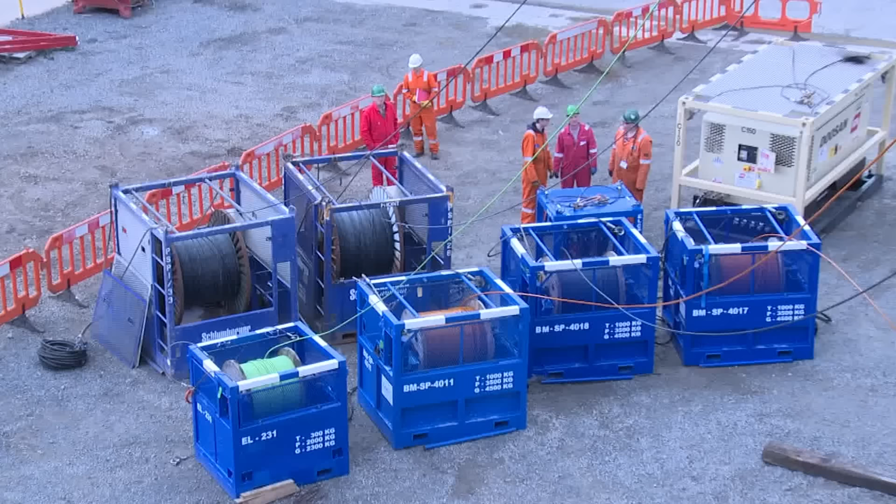It feels like an eternity ago now, but I used to work in the oil and gas industry. I was a drilling engineer. It's something I've mentioned in the past and I've been asked many times to make a video about it, but I never really wanted to. The thing is, most of what I worked on just seems really boring to me. I suppose I could talk about the Troll Alpha, or the Forties subsea pipeline, or I could make the billionth video about the Byford Dolphin incident, but I try to do topics that haven't been covered a billion times already.

6 months ago, Paul Shadison released a follow-up to the best sci-fi show I've ever seen, Solstice 5. If you haven't seen it, just pause my video right now, hit the link at the top right. Paul presents us with a dystopia, free of Earth's ethical constraints, a real-life Factorio where resource extraction must grow at any cost. The most efficient, the most destructive method of deep resource extraction presented is nuclear fracking. Something that could never happen on Earth.

Thing is, nuclear fracking isn't sci-fi. It's happened, many times. It is certainly destructive, but it may be the least efficient form of resource extraction ever attempted. It is also quite possibly the most ridiculous non-combative thing humans have ever done.

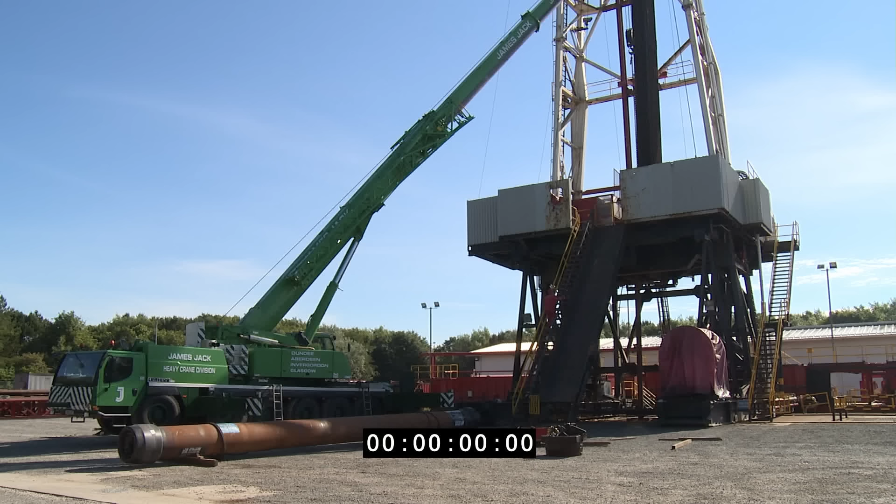Alright, before we start dropping nuclear warheads down gas wells, I need to explain how a gas well is constructed. I used to design oil wells in the North Sea. These were generally bigger and more productive than onshore wells, and they produce mainly oil. But the design is essentially the same. What I used to work on was just bigger and 100 miles offshore.

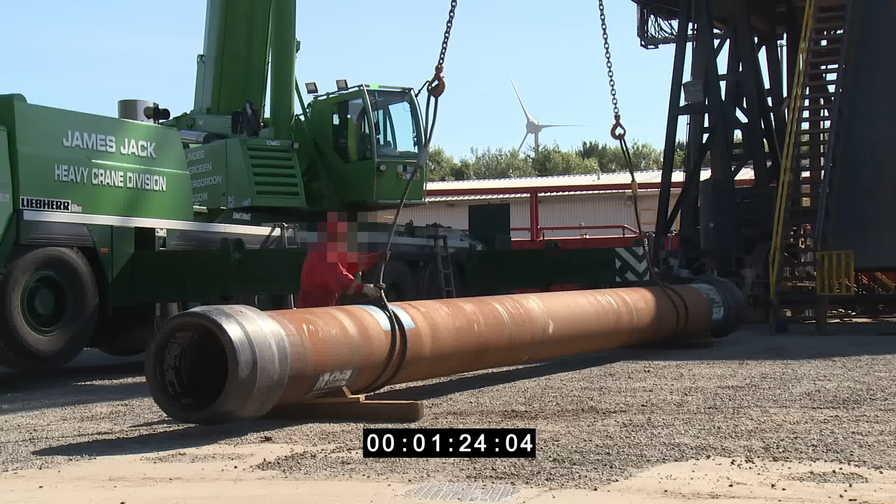I'll mainly be focusing on the drilling engineering side of things in this video, rather than the whole how-a-nuke-works side of things. That way, hopefully, that gentleman who is an actual nuclear engineer won't see this and point out every time I'm an idiot. I'll also struggle for visuals in this video, since basically everything I'm discussing happened underground. I have some public domain footage of the operations which I'll be using and annotating throughout. I'll animate what I can, and I may include some footage of offshore drilling hardware from around where I live. It's much larger than the onshore kit used in the operations discussed, but hopefully it can give some context.

It turned out the day before I released this video, there was a big offshore energy conference in Aberdeen, so I went along with the view to try and film some equipment. I did film some equipment, and it'll be annotated throughout this video, but I actually spent most of the time filming all the cool model boats that some of the exhibitors had on display. Since I couldn't make any models for this video, I think that fits in quite nicely, so enjoy those, I suppose, as well.

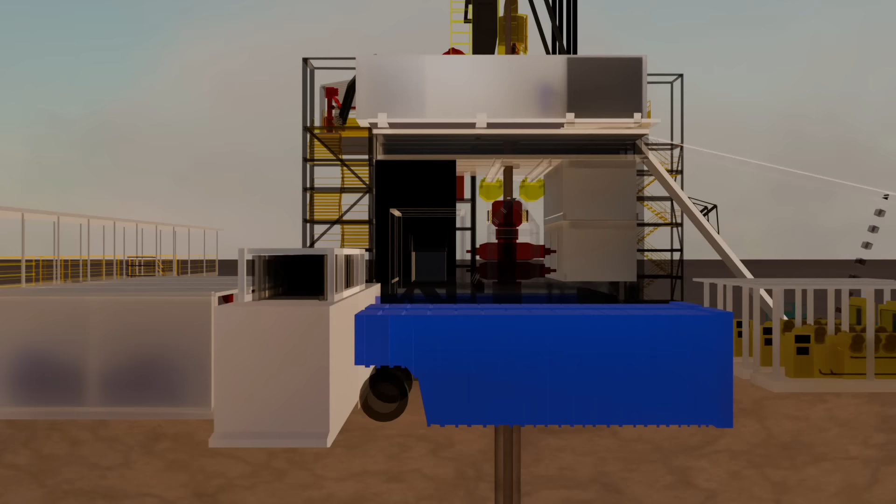Why does a well need designing? It's just a hole in the ground, is a question I have been asked many times. Here is our rig on the surface. Here is our gas reservoir. Let's just drill a hole into the ground then. Okay, to do that we'll need to circulate fluid down the drill pipe and back up the wellbore to carry the cuttings back to surface.

Let's think about that fluid. Here's a plot of fluid pressure in the rocks with depth, with the reservoir being at higher pressure than the formation immediately above it. When we drill into that reservoir, we need to make sure the pressure in our hole is higher than the reservoir pressure. So we choose a drilling fluid of high enough density to stop gas flowing into the well, but not too high or it'll fracture the rock. It's not quite time for that yet.

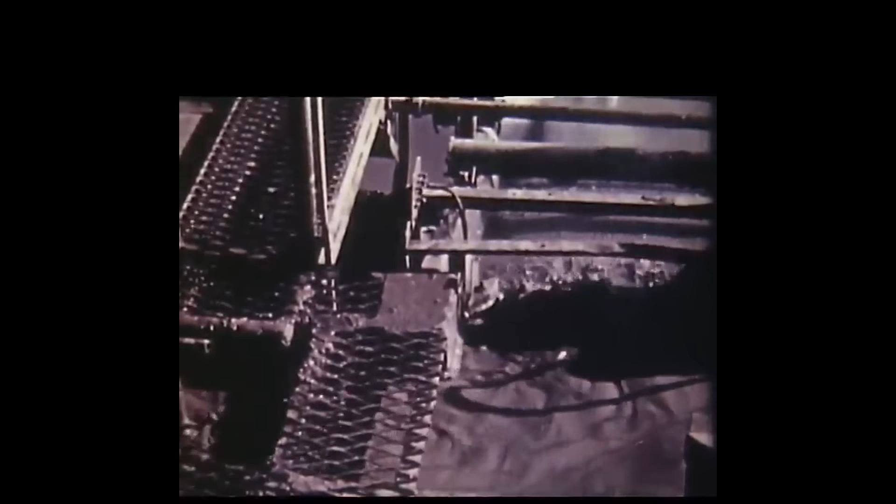Oh, and by the way, that fluid's colloquially called drilling mud. It's basically just water and bentonite. Add more barite to increase the density. You can add a lot of other chemicals too for other purposes if you desire. We'll get back to that later. And just by thinking about the basics of our drilling fluid, we've already done some basic well design. So yeah, it's not just a hole in the ground.

Okay, so we've got sufficient wellbore pressure. Let's drill the reservoir section. Okay, now what?

We can't just let gas flow into the wellbore, it'd rush up and blow out the top. We need to somehow add a valve to the top to control the gas flow. We need to replace the fluid in the well for a lighter fluid to let the gas flow in. So we run casing, like this, and circulate cement to hold it in place.

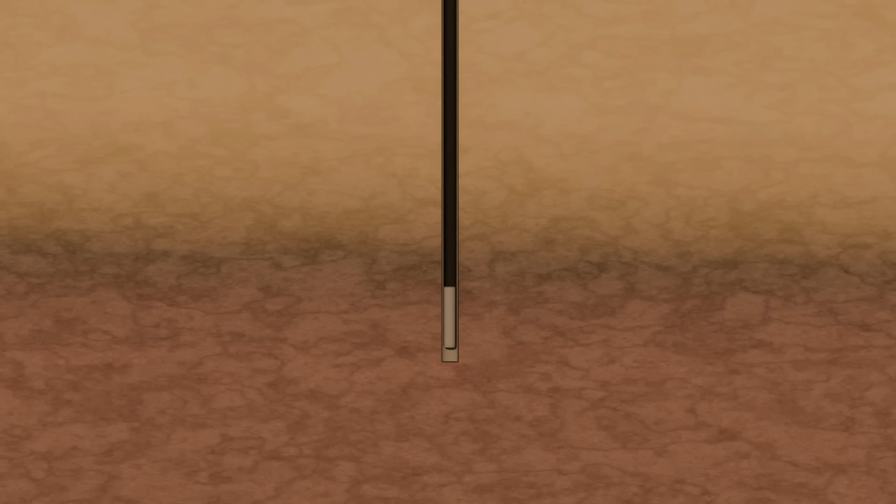Well, the reservoir's sealed off again now, so run a string of shaped explosive charges to the reservoir section. These perforating charges blow holes in the casing to let gas flow in. None'll flow in yet though, remember the drilling fluid's stopping that. We run tubing for the gas to flow to the surface through, like this, attach some valves to the top, and open them to flow the gas out.

In reality, we have multiple casing strings like this, and the well's likely to be deviated. I've simplified basically everything except what we need to know for this video, but we have a gas well. How can we make it more profitable?

All that drilling and forcing drilling fluid into the rock damages the outer surface of the wellbore. This restricts flow of gas into the well. A secondary advantage of those perforating charges is that they tend to blow past that skin damage and help the gas flow in more easily.

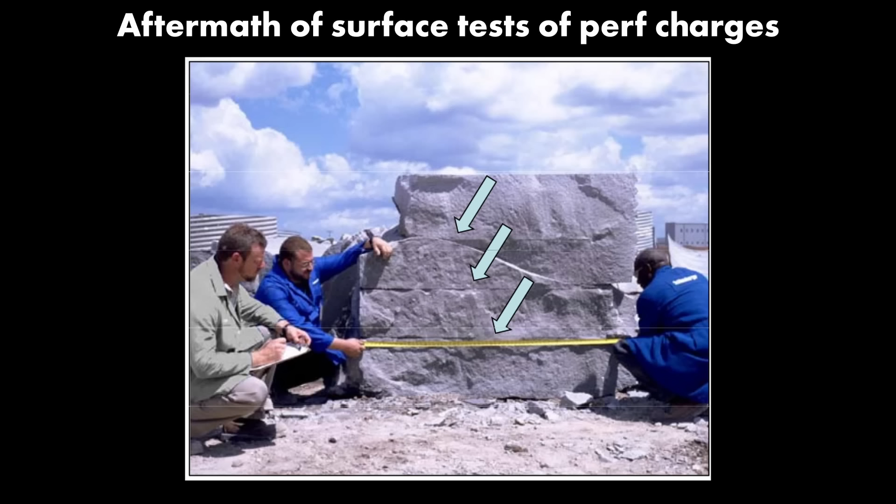Perforating charges are often able to blow more than a metre into the rock. Naturally, they can, and have, cut people in half if detonated prematurely. Explosives are used a lot in the oil and gas industry. They are really dangerous, but from my experience, they're managed incredibly well.

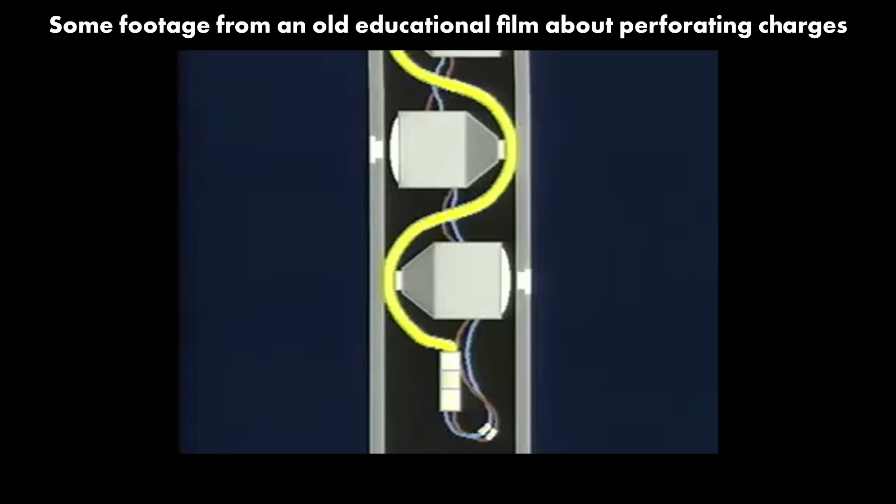From memory, the procedures for dealing with explosives universally included switching off all radio equipment on the rig to minimise the risk of a stray signal causing an accidental detonation. All boats would be evacuated to a safe zone a given distance away, just in case a charge went off in the riser. A dedicated crew member went up the derrick to visually look for lightning, again just to minimise the chance of something setting things off.

And explosives were stored on a jettisonable platform that could be dumped overboard in the case of an emergency. The amount of paperwork and process to use explosives made the entire process boring and laborious, and that was by design.

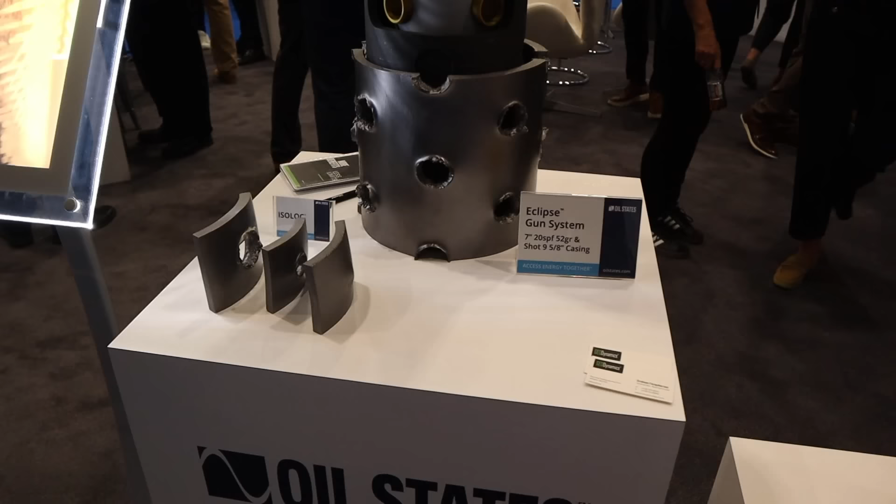I mentioned in an earlier video that we preferred to use what was essentially a tripropellant rocket engine in a different form factor, which used horrifyingly hazardous chemicals to blast out white-hot jets of exhaust instead of explosives where possible. I really want to get that point across here. Explosives are by far the most hazardous thing used in a drilling operation.

Since about the 1860s, American gas drillers realised they could dump as much nitroglycerin down oil wells as possible and detonate it. This was before the days of perforating charges, where reservoir sections would be drilled out as an open hole. The explosion would fracture the reservoir formation and in some cases allow for measurable increases in gas production. It was a crude and unpredictable method, but often worked to an extent.

Just to be clear, when I say reservoir formation, I mean rock, usually sandstone, which contains gas in the pores between the rock grains. Fracturing that rock increases its overall permeability and lets more gas flow into the well.

If you've seen my full video on the tripropellant rocket, you may think that was one of the most dangerous ideas ever executed. I have a lot of comments on that video declaring the idea as stupid and reckless. Or you may think blowing up large quantities of nitroglycerin sounds worse. Oh, we've seen nothing. That is nothing compared to what we're about to talk about.

At any given time, the world is full of problems without apparent solutions. Sometimes, however, it's fun to focus on the opposite, solutions without problems. Something like, I don't know, a blockchain. Very, very clever, but pretty much useless save for a few niche cases.

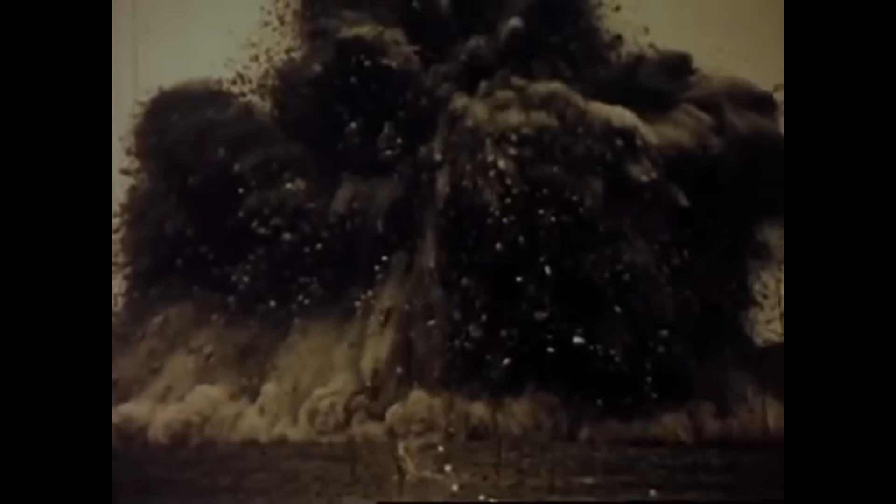Some days you just can't get rid of a bomb. And that is how the legendary Project Plowshare was born. Peaceful use of nuclear weapons is quite the concept, and nuclear fracking was the application that was advanced the furthest.

We'll talk about Plowshare's most unhinged proposal at the end of this video. As ridiculous as everything we're about to talk about is, nuclear fracking was also probably the least ridiculous concept explored by Plowshare. Let's draw a nice graph to put things into context.

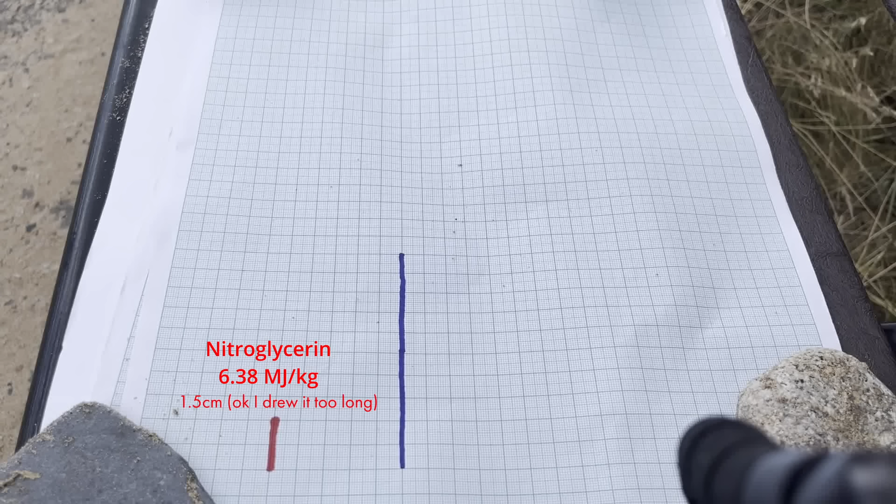We just tried to frack a well with nitroglycerin. Here is the energy of nitroglycerin - that's the amount of energy released when a pound of it is burned.

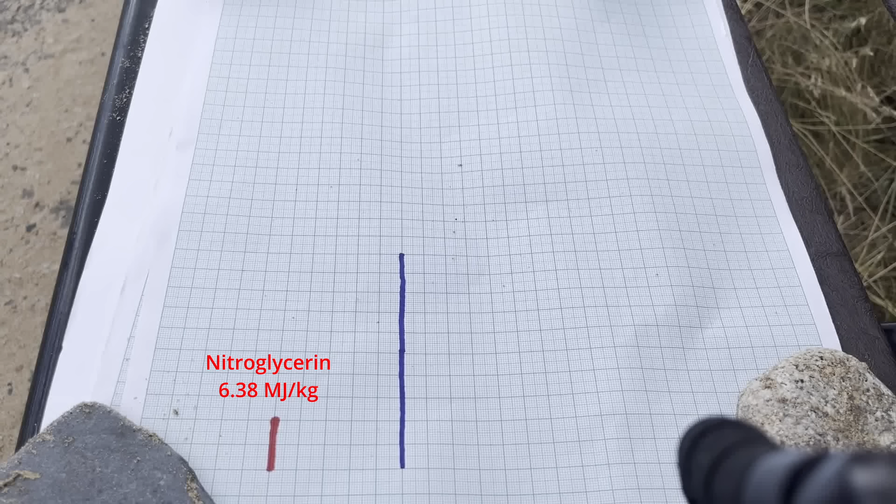Okay, why is Alex using pounds now? I'm going to keep the unhinged factor up by using oil field units throughout this video instead of US standard units. If you aren't aware of oil field units, I'll probably make a follow-up video explaining them - they make US standard units look orderly and logical by comparison. I know it's not actually directly comparable because nitroglycerin included the oxidizer, but trust me, it's not going to matter.

Here's a pound of natural gas. Weird to express that by mass, I know, but again, don't worry about it. Because now, let's look at the energy density of uranium-235.

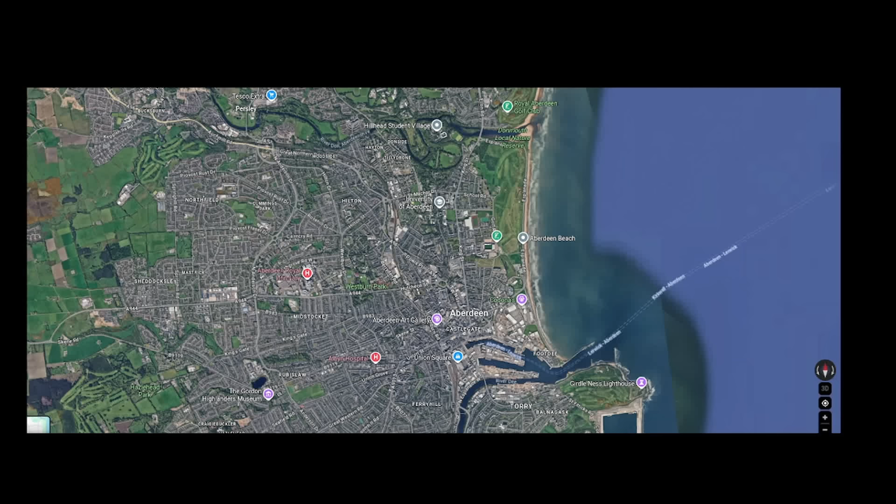And just to be clear, there are different ways of defining energy density for nuclear reactions. That could be uranium-235 in different types of reactor, undergoing different types of decay, or whatever. And if you use it in a bomb, you don't get anywhere near 100% energy conversion. But I don't think it really matters if our line goes to Dundee, Edinburgh, Glasgow, whatever - you get the point. Now, just imagine how hard we could frack a well if we used a nuke instead of nitroglycerin. Imagine the value we could deliver to our shareholders.

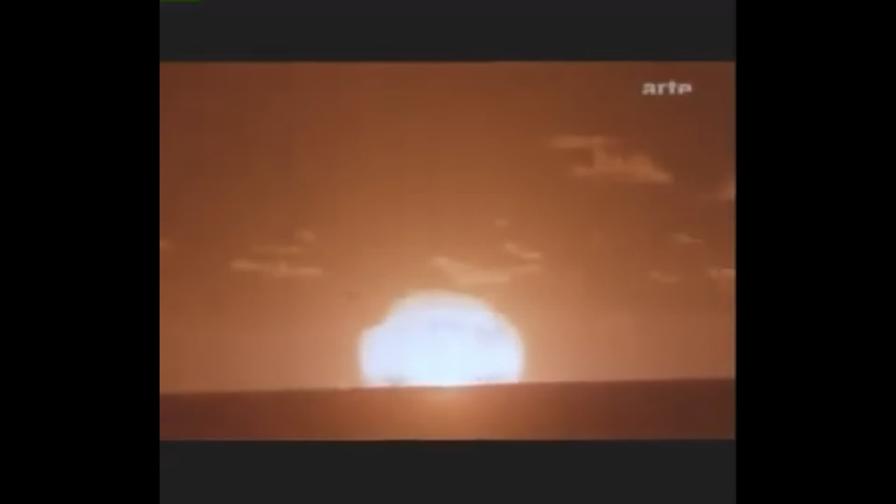There are 6 countries in the world that have nuked themselves. If you want to test out your nukes, you kind of have to do that. Or you could nuke a friend, or nuke the whales, or nuke space, or nuke paradise. Of those 6, 2 have nuked themselves for commercial reasons.

Let's begin with the first time the US did that.

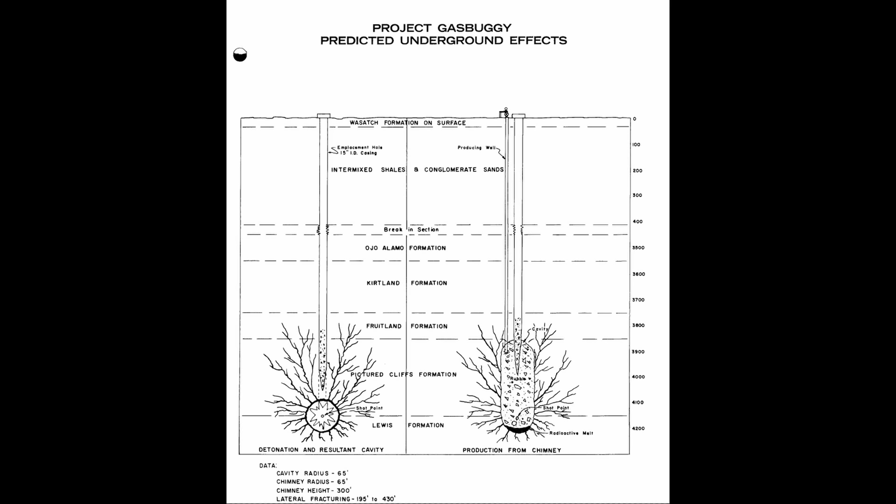I'll be using the various design documents and post-work evaluation reports to piece together the next few chapters. I'm still pretty fluent in well-design documents, and honestly, some of them look basically identical to the ones I used to read daily for North Sea oil wells. Any well report will frequently refer to downhole tools as just tools or devices. The reports we'll be studying do exactly the same, except every now and then the device in question is an atomic bomb. So let's look at the feasibility report for the US's first nuclear fracking operation, Project Gasbuggy.

A lot of you probably already have something in mind for the nuclear device. We definitely don't want something too big, but the concept of a small nuke is generally something of an oxymoron. The weapons that obliterated Hiroshima and Nagasaki were very much small in comparison to the veritable pick and mix available to the US in the 1960s.

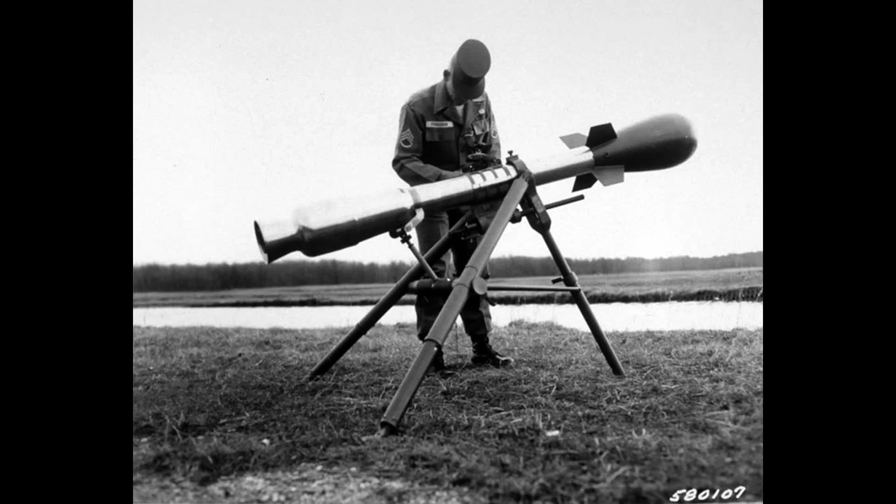So, I bet many of you are picturing one of these, a Davy Crockett bomb. This is probably the only nuke put into service that I'd call small. It looked kind of adorable and had a yield of about 15 tons of TNT. For the record, that's about the same as the current largest air-dropped conventional bomb in the US arsenal. Certainly a lot more dangerous than conventional explosives, but I reckon we could justify a measly 15-ton explosion downhole.

Well, the proposal was actually for a 10-kiloton bomb. Keep that number in the back of your mind, it's gonna change. Prior to Gasbuggy, the Hardhat test in 1962 saw a 5-kiloton device detonated underground. Subsequent boreholes drilled into the surrounding rock were pressurized with air and the leak-off rate measured to determine permeability. The fractured rock a few hundred feet from the detonation center exhibited about 2 orders of magnitude higher permeability than before the blast. Gasbuggy sought to replicate these results, but in a gas-bearing reservoir.

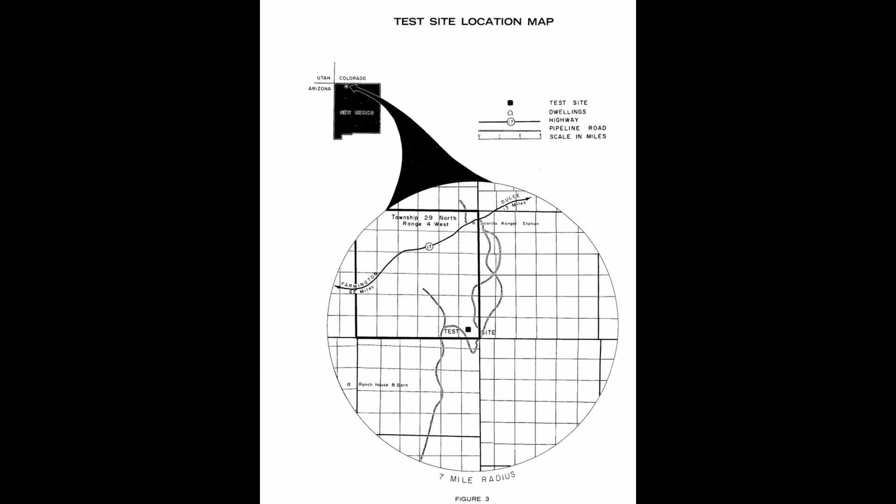The test site was here, high in the hills of New Mexico, and, of course, right on the edge of a Native American reserve. The target formation was a gas-bearing sandstone layer about 300 feet thick and about 4,000 feet below the surface. An existing well just 600 feet from the site had been producing gas from this formation for several years prior, so would function as a good performance comparison.

On the subject of the existing well, who was actually doing all of this? Gasbuggy was a private-public collaboration between the US Atomic Energy Commission, who'd be supplying the nuke, and the El Paso Natural Gas Company. Of course, this is a great setup, as if there's one market sector that could be trusted with nuclear weapons, it is definitely private oil and gas companies.

Anyway, I particularly like this little tidbit from the feasibility study assessing the cost of a nuke. Quote: 'The latest information made available by the Atomic Energy Commission is that the projected charges for nuclear explosives will range from $350,000 for yields of about 20 kilotons to $600,000 for yields of 2 megatons.' End quote.

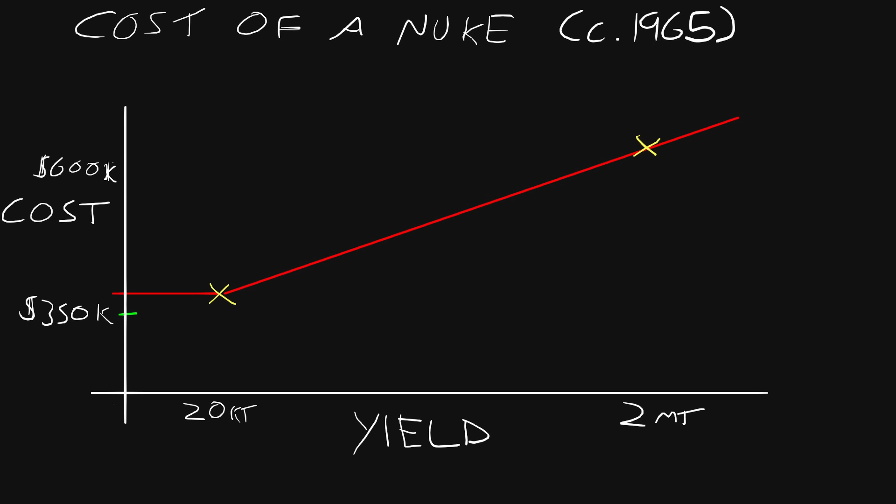Converting to today's money, that's about $3.5 million and $6 million respectively. I have two immediate thoughts here. Number one, nukes are apparently a lot cheaper than I thought, or at least they were in the 60s. For the price of a large house in a major city, you can wipe said city off the map.

Number two, look at the value for large nukes. I presume there's a fixed cost for building any size of warhead, but based on the two data points here, once you've got all that in place, increasing the yield is proportionally cheap, so buy big.

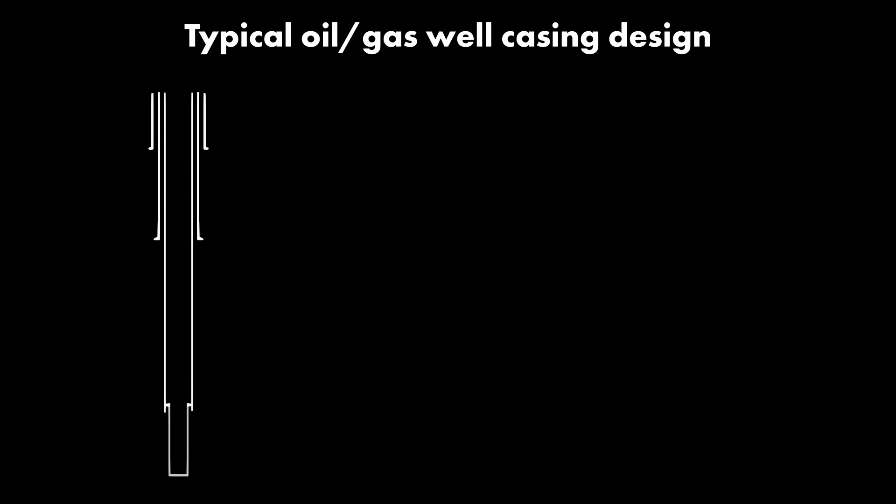I think this is one of these points in the video where it's good to stop and remind ourselves how balls to the wall insane it is to have a preliminary cost analysis of an atomic bomb in a drilling study. Anyway, next is the small matter of building a device that can actually fit down a gas well.

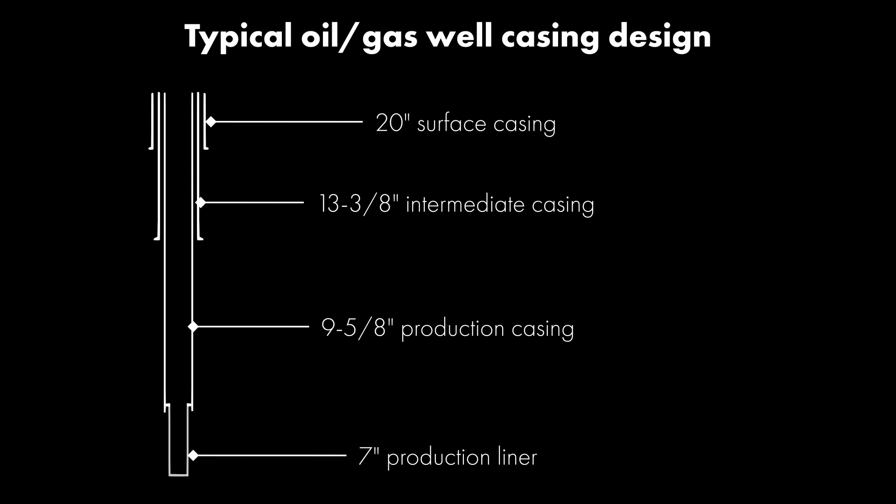Well casing comes in standard sizes. The production casing shown in this diagram tends to be 9 5/8 of an inch in external diameter, and if a production liner is used, that tends to be about 7 inches. Of course, well diameters can vary wildly, but today we'll generally be dealing with 9 5/8 inch casing. When accounting for wall thickness, that would leave about 7 inches for a device. That device would be built by Lawrence Livermore National Lab.

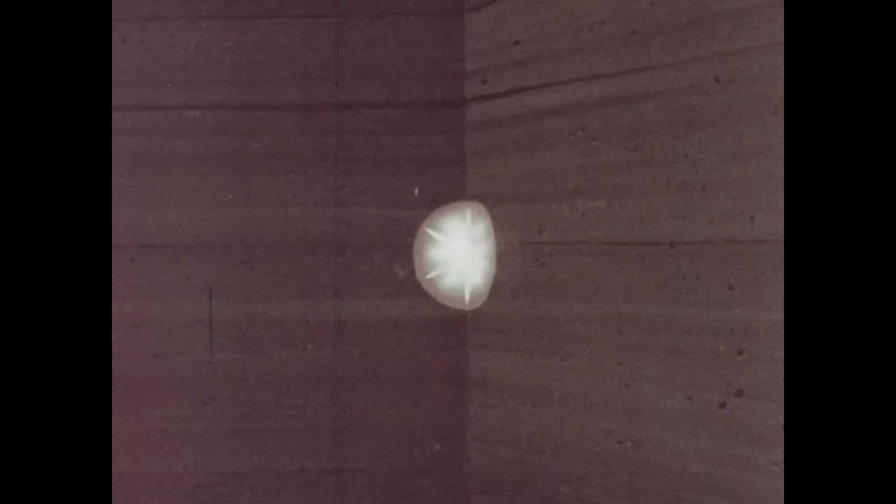Everything we will deal with today will involve fission-only devices. To the best of my knowledge, nobody's tried to frack a well with a fusion bomb yet. So, the bomb - I'm just going to start calling it a bomb rather than a device or a charge or whatever - would be run into the drilled hole, which would be filled with cement to entomb it before it was detonated.

The prediction was that this would almost instantaneously vaporize, melt, and generally make a colossal mess of all the rock within about 100 feet. The resulting chamber would then collapse along with much of the rock above. This would form a rubble chimney through which the gas would flow upwards. Surrounding this chimney would be a fractured zone out to some 400 feet or so. The rubble chimney would be drilled into.

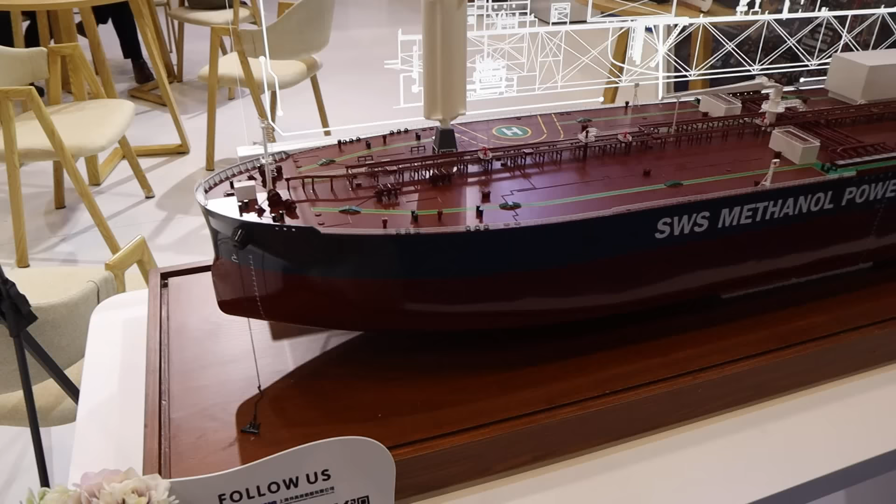You may spot a massive issue with that if you were paying attention earlier. Completion tubing would be run to a wellhead on the surface and the gas allowed to flow. Now, that massive issue is not radioactive contamination - that is a separate massive issue. But luckily, the feasibility study devoted a whole 2 pages to addressing this.

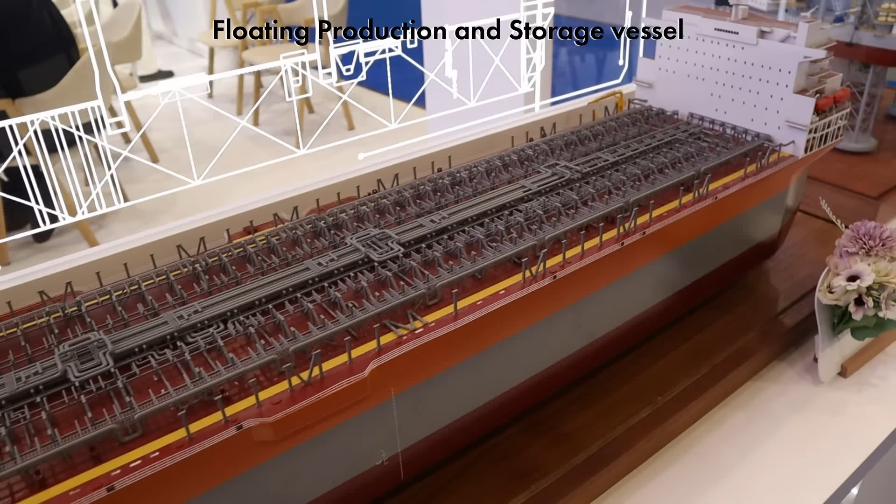Those 2 pages are best summarised as: fission byproducts decay relatively quickly, so wait a while before flowing the gas to surface. Which, of course, is correct to an extent - it is the reason Hiroshima isn't a radioactive wasteland now, but let's come back to that later. It's also explicitly stated that exactly what fission products and how much of them would be produced was essentially unknown.

Again, to put this into perspective, one of the absolute nightmare scenarios back when I worked in the industry was accidentally drilling into a radioactive source. If you can think of something hazardous, it is probably run down oil wells frequently. Radioactive sources are used in some of the well logging tools, for instance those used to measure rock porosity, and those sources are extremely active.

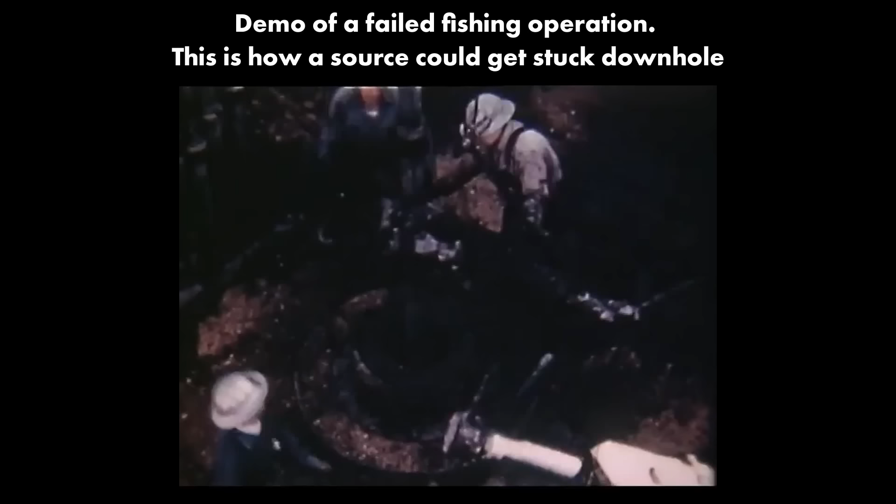We're not talking about that little fleck in your smoke alarm here, we're talking about Goiania accident scale and up. These can, and very rarely do, get stuck down hole, and if they can't be retrieved, the only option is to abandon them down there.

This would involve a lot of paperwork and then entombing them in cement which was dyed green. If somehow someone screwed up and tried to re-drill the well, hopefully they'd see the green cement in the return fluid, and if that all failed, all rigs have radiation detectors monitoring the returning fluid for radioactive contamination. Mainly for naturally occurring radioactive minerals in the cuttings, but if a man-made source was somehow accidentally breached and made its way into the wellbore, everyone would know about it.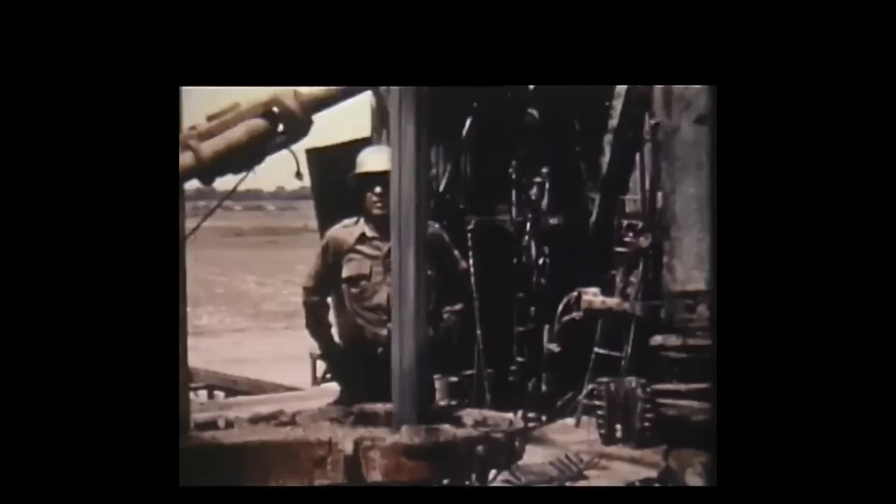Every truck in and out of our stockyard had to pass through a radiation detector too, just in case something somehow got loose and made its way back to shore. So, the prospect of intentionally drilling into a known radioactive zone certainly gets my attention. Yeah, it's not going to hit material as active as something I just described, or at least I don't think it would, but still, I'd recommend against it.

Natural decay aside, the feasibility study for Gasbuggy predicted that the unfissioned uranium and the heavier daughter products would be entombed at the bottom of the chimney in glass, which solidified from the molten rock. Alright, let's see how that all went.

By 1967, the US Atomic Energy Commission was ready. The El Paso Natural Gas Company were ready. Lawrence Livermore National Lab had delivered the bomb. In fact, they over-delivered. It wasn't a 10 kiloton bomb, it was 29 kilotons, or about 2 Hiroshimas. Here it is. I can't tell you a huge amount about it because not much has been published, but I think it suffices to know it was a 29 kiloton fission bomb in a 7-inch canister. It contained all the necessary control and monitoring electronics to not only detonate the bomb when the time came, but also to ensure the environment was within acceptable parameters, namely the pressure and temperature.

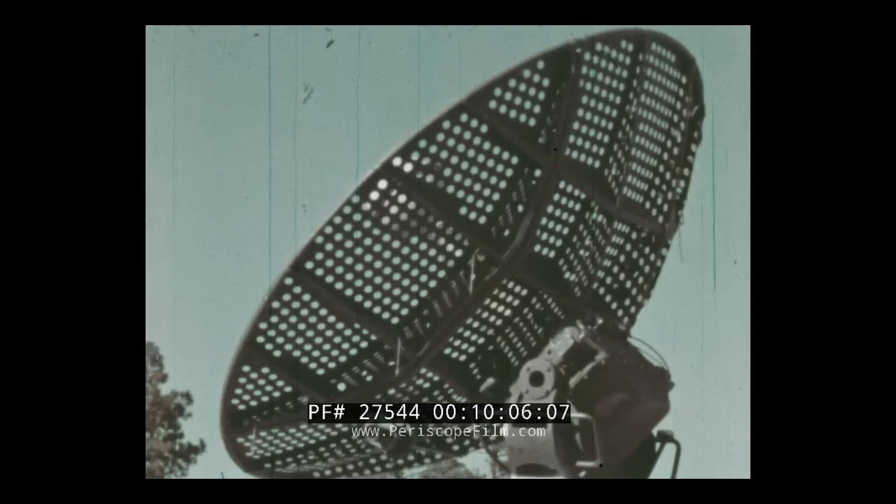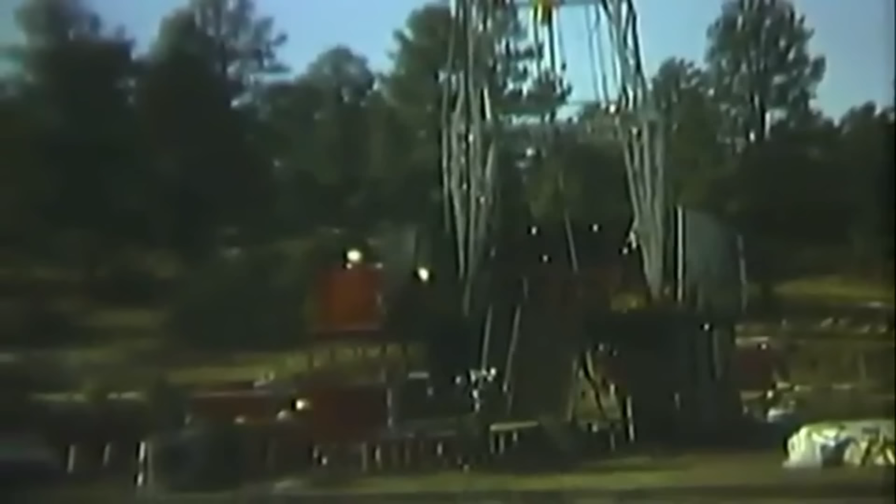The temperature control appears to be that of the greatest concern. Bottom hole temperatures for Gasbuggy were 131 degrees Fahrenheit, which is a very low temperature for a hydrocarbon well in my experience. Remember, North Sea wells are generally about 3 times that depth and 10 times the complexity of what we're dealing with here. Nevertheless, the explosive canister contained active refrigeration units to maintain a temperature below 100 degrees Fahrenheit, the max operating temperature for the nuke.

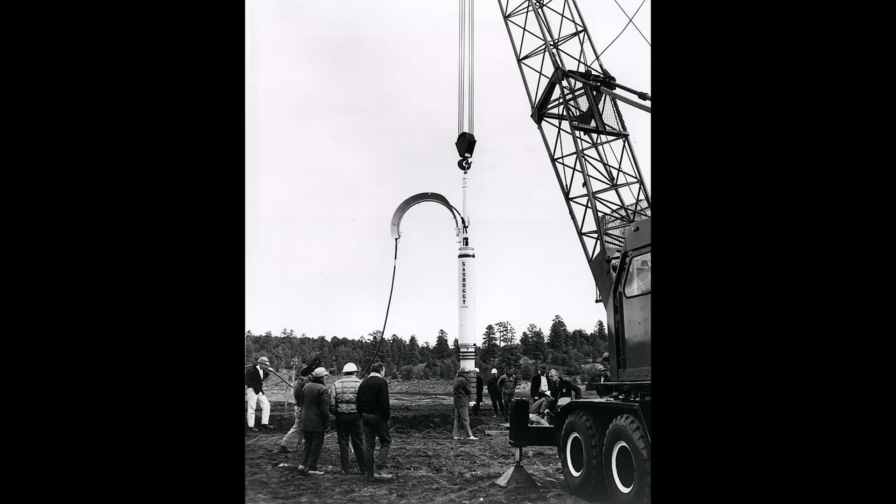The first one of those was that everyone non-essential would evacuate the rig floor when explosives were at surface. Usually, you'd just have an explosive specialist, a driller, and the minimum number of roughnecks to run them in. In fact, when the charges are being armed, the specialist is normally the only person on the drill floor. Apparently that doesn't apply with nukes. Look at everyone here just chilling, living in the moment.

The emplacement well itself was a bit odd in terms of gas wells, in that it was pretty much the oversimplified hole in the ground I walked us through in the intro. A 13 3/4 inch hole was drilled to depth and then reamed out to 28 inches. Not only is this a huge wellbore diameter for a hydrocarbon well, but running a single hole section from surface like this is unusual. The hole was cased off with 20-inch casing.

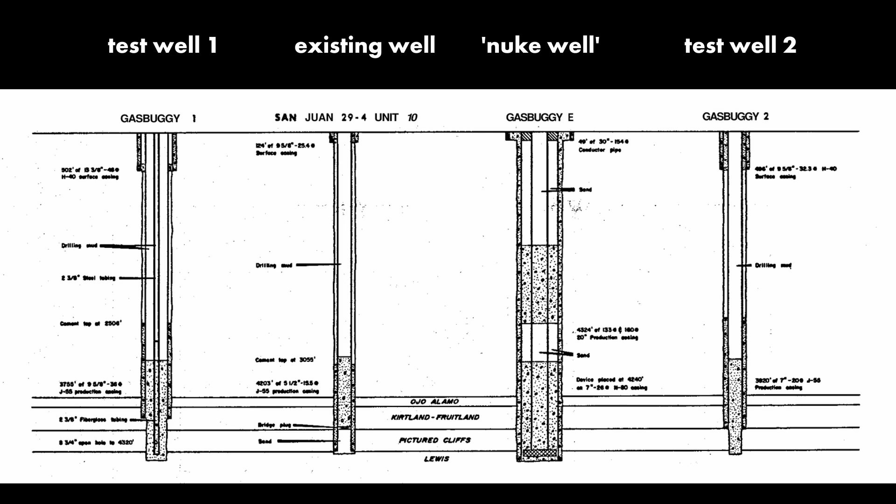Prior to drilling the emplacement well, a more conventional well was drilled 188 feet away to assess the in-situ permeability and flow rate. A second monitoring well was drilled 302 feet away before being temporarily plugged with cement. This would be used for flow testing after the detonation. Both of these wells are seen here. They look far more conventional, with 9 5/8 and 7-inch casing at the reservoir respectively.

The bomb was pre-armed and run to the bottom of the emplacement well. Some problems were encountered, of course. The cold weather apparently hampered drilling operations, and the downhole refrigeration unit behaved sporadically at points, partially failing with the bomb at depth. But operations proceeded, and the device was cemented in place, with cement pumped all the way back to surface.

On the 10th of December 1967, the immediate area was evacuated. A bunch of VIPs gathered in a marquee for some reason, and the US entered the Nuclear Fracking Club. As I gather, there was no excessive ground movement. There's a video floating around of a cow being startled by an underground nuke, but I suspect that's from one of the earlier, shallower tests, not from Gasbuggy.

To the credit of everyone involved, extensive radioactive monitoring sensors were installed around the site and down both of the monitoring wells. A small team of monitoring crew were sent in to confirm the site was clear of contamination, then the drill crew were brought back to drill the well.

Again, contrary to my suggested approach from earlier of maybe waiting a while to let the most active fission products decay, re-entry began 3 days after the detonation.

Upon approaching the newly created rubble chimney, circulation of the drilling fluid was lost. That's the massive issue I'd hinted at earlier. Normally, that would be a pretty hairy situation in a conventional well. There are a bunch of solutions to lost circulation. My favourite is to pump shredded up mica down the well to hopefully plug up the formation. Hit a reservoir while taking losses and you risk a blowout. And remember, that blowout will be radioactive in this case.

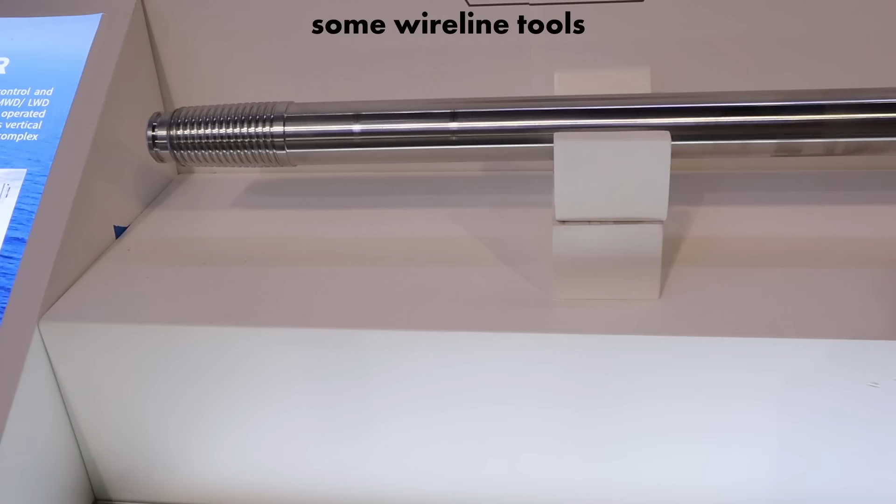No word on how tritiated it was, but it was stored in a large tank and injected into the flare for, quote, disposal, end quote. It stated that there were, quote, no hazards to any personnel involved from this, end quote. For what it's worth, Gasbuggy was a long way from any built-up areas, and I presume the radioactivity was sufficiently diluted in the atmosphere to not cause any long-term problems.

Okay, so let's just put aside the awkward problem of radioactive contamination. Take a 1960s approach and just ignore it for now. How much extra gas did the well produce?

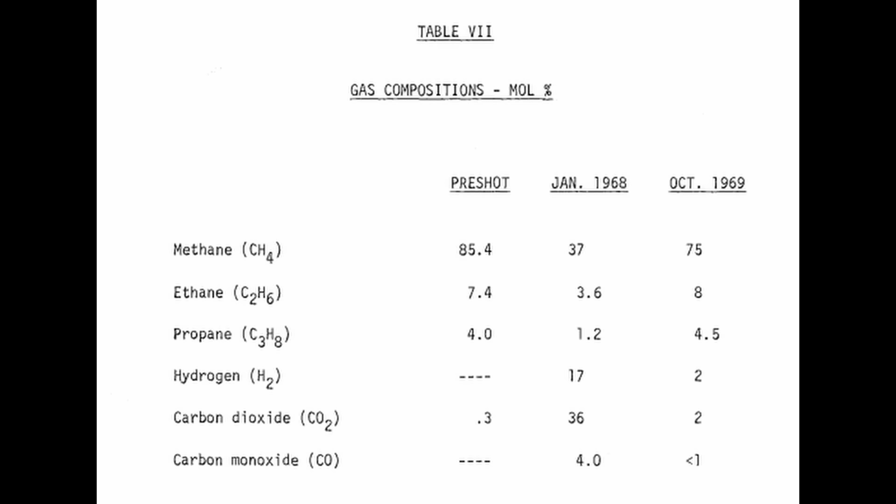Well, first of all, for the first few days, 36% of that gas was carbon dioxide. This was far higher than anticipated and was thought to originate from the vaporization of the rock. For the record, CO2 absolutely shreds production tubing unless you use expensive high chromium steel.

As for the natural gas, by measuring flow between the emplacement and monitoring wells, the permeability was estimated to increase about 5-fold to around 8 millidarcies near the rubble chimney, dropping off rapidly. At 250 feet from the well, we're looking at a permeability of less than 0.05 millidarcies.

The team had anticipated more than 100 millidarcies, so this was a disappointment. What is a millidarcy? It's one of the many cursed oil field units, but for context, about 10 millidarcies was typical for the reservoirs I used to work on. But an increase is an increase. And remember, this is a gas well, so much lower permeabilities are typical.

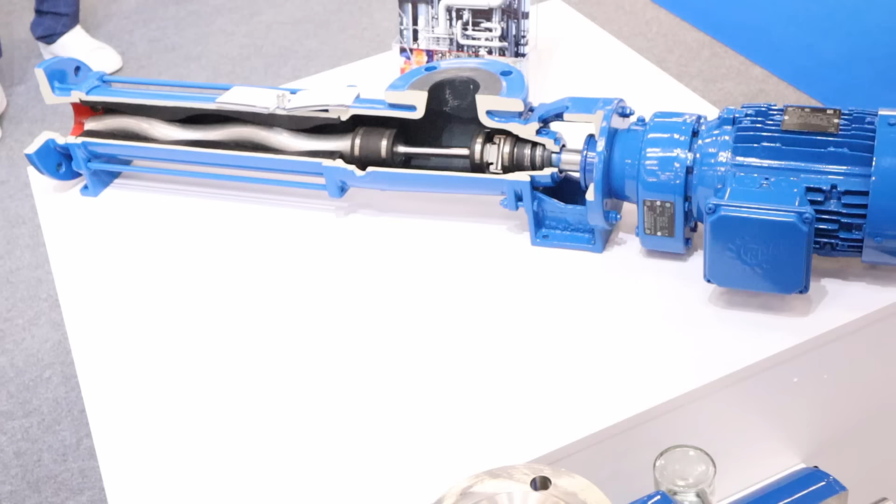How much extra gas did it produce? About 5 times as much as the existing nearest well, and about 8 times as much as the average of the 5 nearest wells in the field. The Gasbuggy emplacement well was the highest producer in the field during the flow tests, and would have produced an estimated 900 million cubic feet of gas if left to produce for 20 years.

Quick note, 1 cubic foot of gas isn't much. Although that number sounds huge, it's not remarkable for a gas well. But this does sound pretty fantastic. Of course, there's a big old caveat.

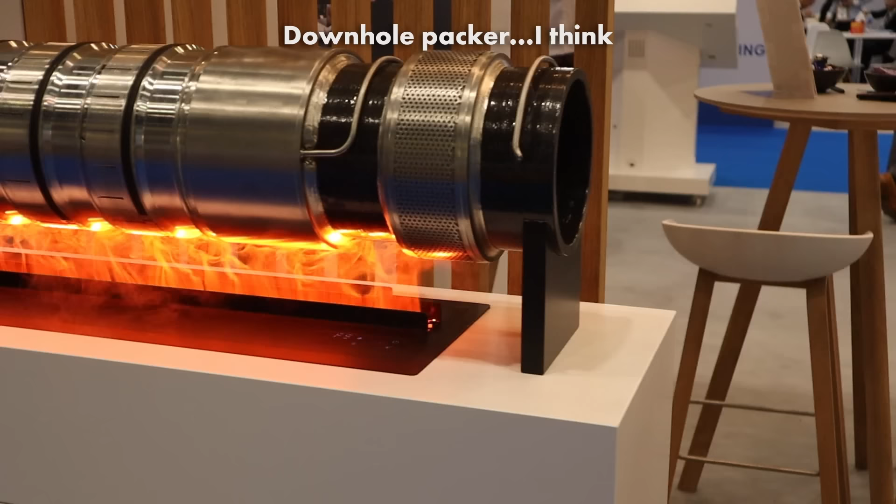Remember how I focused on the unusually large diameter of the Gasbuggy emplacement well? Generally, the higher the diameter, the higher the gas flow. A 5 times increase in flow rate is about what we'd expect to see through 20-inch casing compared to 9 and 5/8-inch casing.

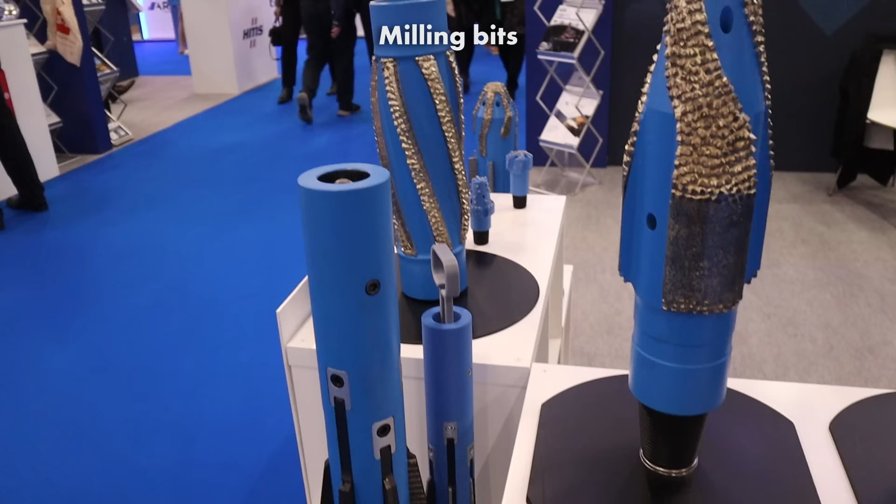So, while the addition of an atomic bomb turned a significant proportion of the gas into carbon dioxide and made it radioactive, it's impossible to categorically determine whether it actually increased the production at all. I sound a bit like one of those weird SpaceX people now, but at least they got good data.

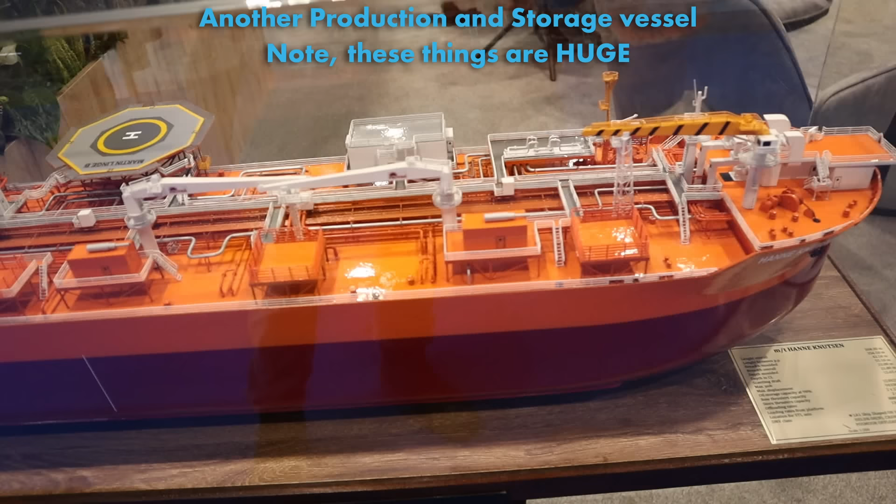And indeed they did. The post-shot reports are quick to point out that despite the disappointing permeability results and ambiguous flow, the fact it was shown nuclear fracking could even be carried out safely at all was considered a success. The USGS were happy with the news, and their models regarding chimney size and fracture extent were validated. So who knows? If anyone ever needs to detonate a nuke far underground again, we know what'll happen.

But all that aside, with the failure to demonstrate commercial viability, the team packed up and called it a day, and bigger bomb! The solution was clearly a bigger bomb.

Project Rulison was the second attempt to fracture a well with an atomic bomb. And spoiler, this one was the most successful of all the US tests. The objective this time wasn't just to prove it was possible to fracture a reservoir, but to demonstrate commercial feasibility.

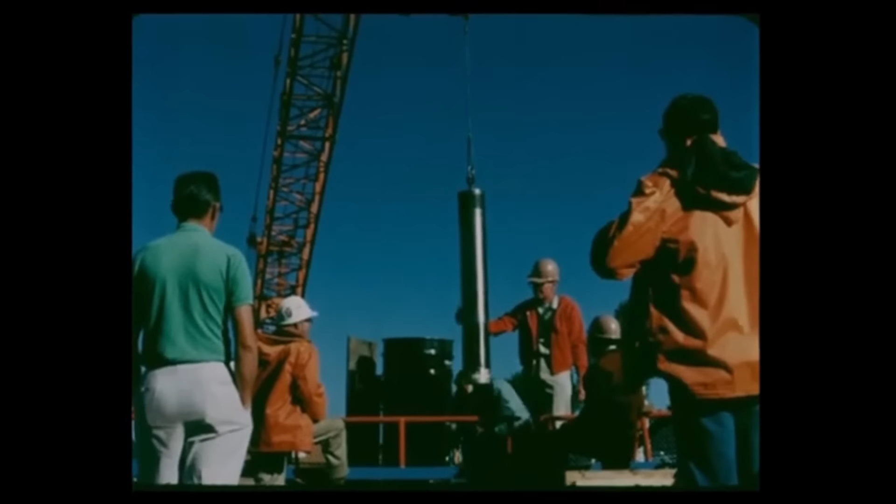Now, we aren't talking that much bigger. Gasbuggy's blast was 2 Hiroshimas. Rulison's was closer to 3 Hiroshimas. This time we're in Colorado, near the district of Rifle, just to make things that bit more American.

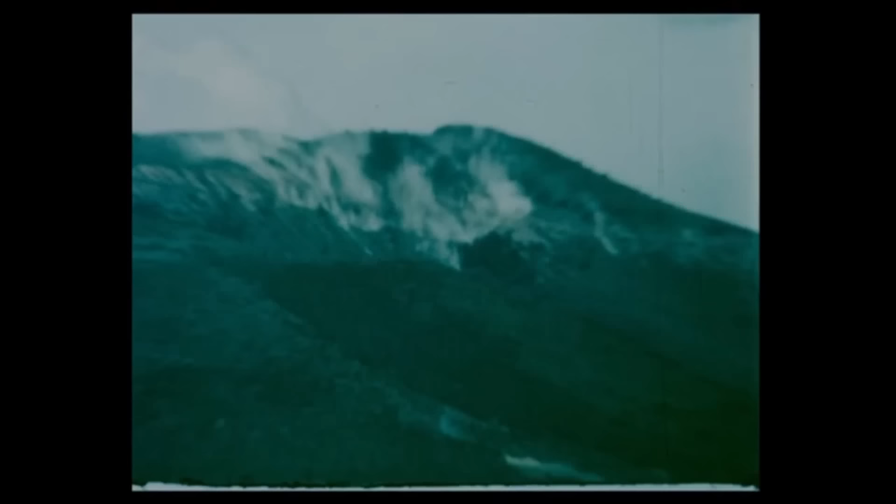And the detonation occurred on September the 10th, 1969, at 3 p.m. I know it was 3 p.m. because the drilling report specifically states this time was chosen to detonate a 40 kiloton atomic bomb after considering a few factors which included the work schedule of local underground mine workers, the traffic frequency of the Denver and Rio Grande Western Railroad, and the local school bus schedule.

Carried out this time in conjunction with the Austral Oil Company, a different emplacement method was used for the bomb. So let's take a look at the setup.

As with Gasbuggy, an emplacement hole was drilled and the bomb inserted into the reservoir section. Rulison was much deeper at around 8,200 feet bottom hole depth. The bomb was about 9 inches in diameter and plenty of video of it survives. It was run on the armoured cable rather than on the casing. Once placed, the bomb was cemented in place as before.

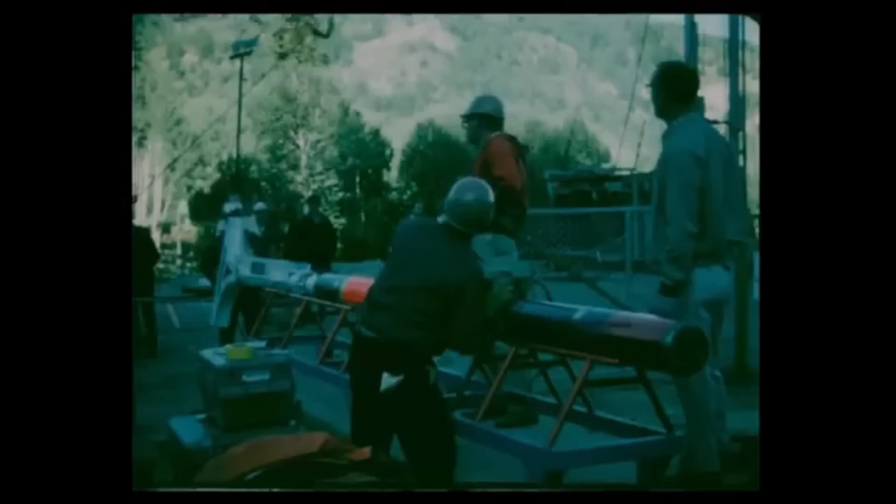The bottom hole temperature was much higher than Gasbuggy, at around 430 degrees Fahrenheit. I'm not exactly sure how that was managed, but I presume the bomb and all its associated electronics were just built to handle that kind of high temperature this time. As with Gasbuggy, details on the device itself are very sparse, with the device being an atomic bomb and all.

Prior to all this, an exploration well was drilled and used to measure gas flow before the detonation. It was plugged back and then sidetracked after the detonation occurred. This is a common practice, particularly with offshore wells where there's limited slots on a platform to drill from. A depleted well can be sidetracked into a more productive area of the reservoir.

In this case, it was sidetracked into the newly formed rubble chimney, which was estimated to be about 250 feet in height, with a fracture zone extending about 400 feet from the blast centre.

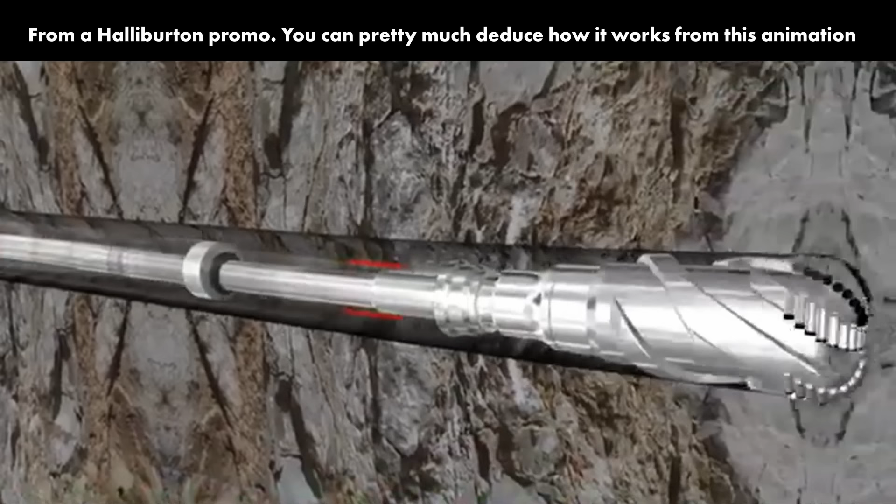Today, this is done with something called a rotary steerable system, which honestly makes directional drilling trivial from a well engineer's perspective. Rotary steerable systems are far too complex to discuss in detail now, but let's just say they're the reason that more than half of my videos to date talk about inertial guidance systems at some point.

Crucially, the team waited 7 months to drill the sidetracked appraisal well. The drilling report states this allowed the radioactivity to decay to 1,000th of that present after the detonation. I'm not sure how they arrived at that figure, since tritium has a half-life of 12 years, but perhaps they were referring to the other fission products from the blast.

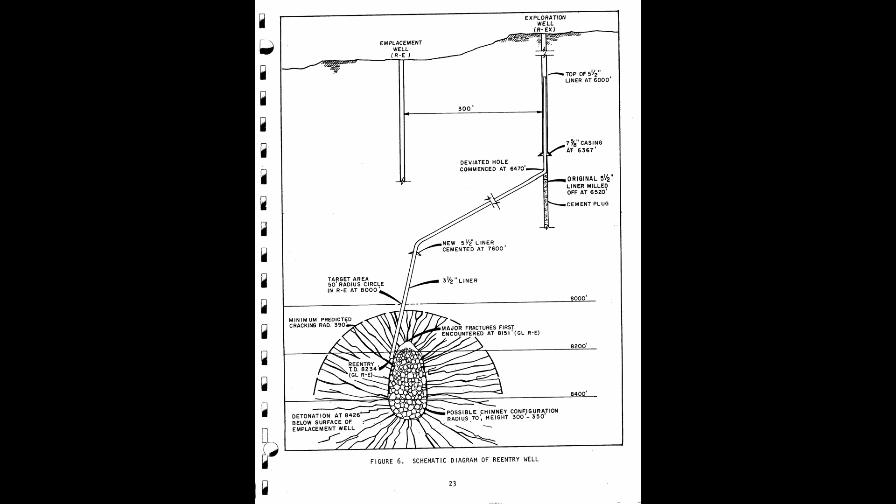Using the same well for pre- and post-shot testing would have no doubt complicated operations, but allowed for comparable tests to be performed to accurately determine the improvement in production. So what was the increase?

Let's do gas volume first. In 108 days, the appraisal well produced the same volume of gas as a typical well in the field would in about 10 years. The permeability of the rocks surrounding the blast increased 33-fold out to a radius of 2.75 times that of the chimney. It was estimated that the well would produce between 1.8 and 4.5 billion cubic feet if left to flow for 20 years.

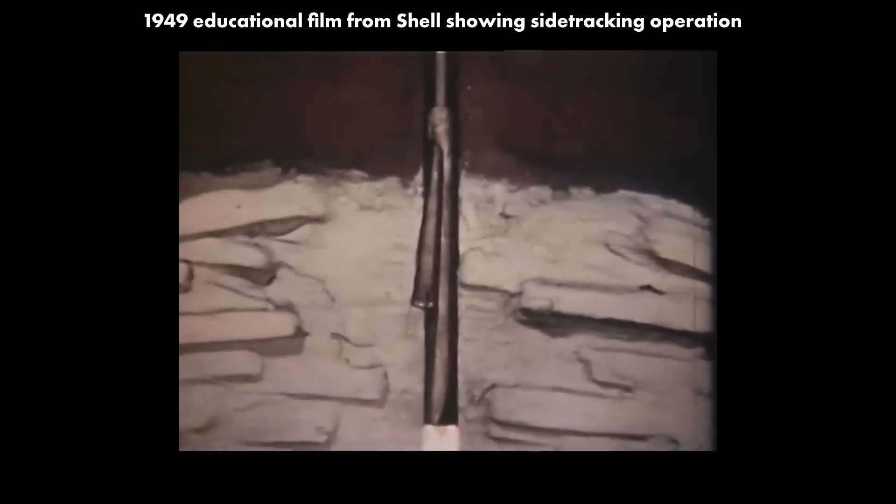Rulison positively demonstrated that detonating an atomic bomb down a gas well will absolutely give a huge increase in gas production if done correctly. Of course, this is putting aside those niggling factors like the produced gas being radioactive and the safety challenges of handing nukes over to a bunch of roughnecks.

As for the radioactivity of the gas, well, not great, but not terrible. Actually, no, it was still pretty terrible. But a significant improvement over Gasbuggy.

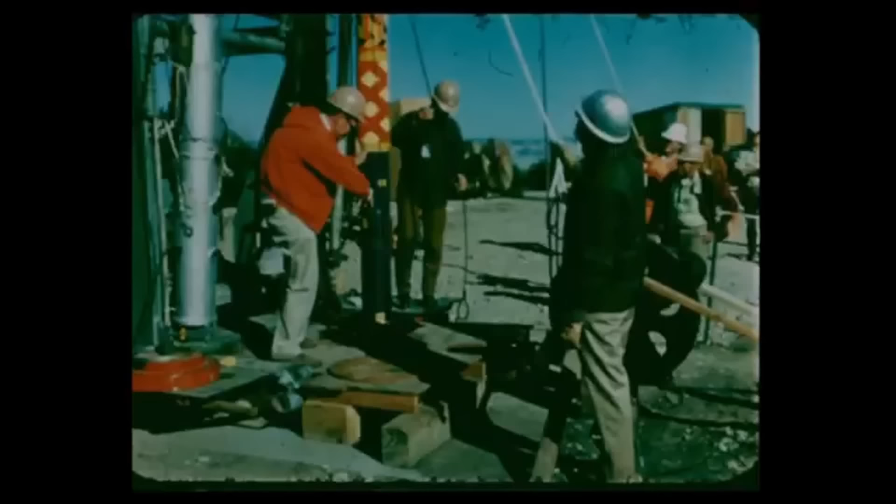About 10,000 curies total were estimated to be present in the chimney after detonation. Less than a quarter of that seen in Gasbuggy, and from a larger blast and a much larger volume of produced gas. After 180 days of production, the activity in the gas had fallen to about 0.2 microcuries per cubic foot, or about 250,000 becquerels per cubic meter.

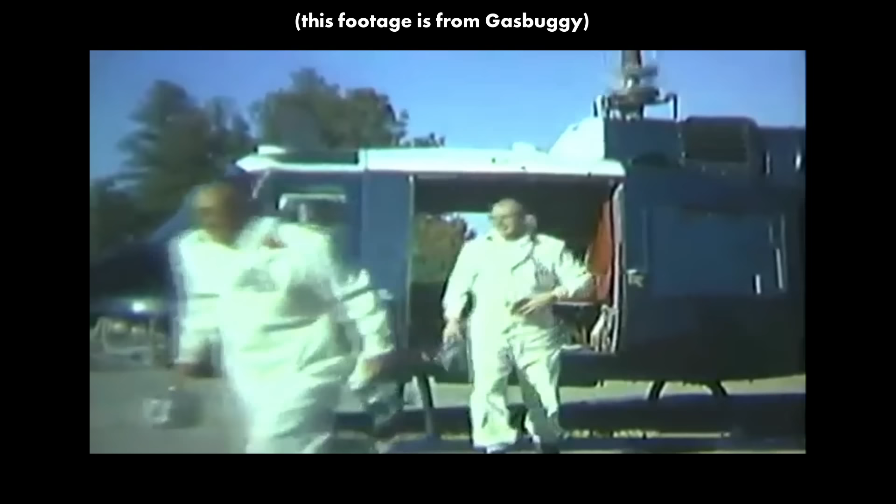The trend was continuing downwards, so I'm pretty confident it would have exhibited less radioactivity than the Gasbuggy gas if flow testing were carried out over the same 2-year period. But still far too radioactive to be sold. However we go about it, any radioactivity tied up in the produced fluid had to be released to atmosphere while the chimney region was cleared.

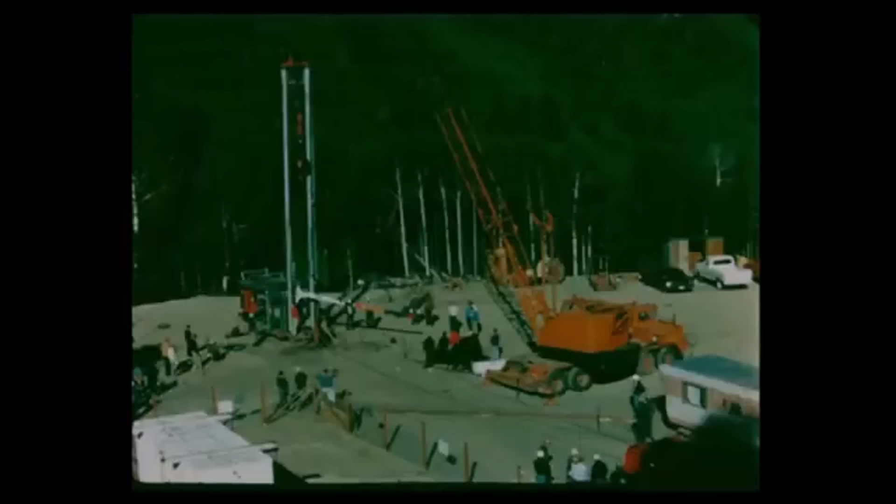I'm sure this is a very simplified view, but the sleeve would have absorbed much of the neutron activity from the blast, preventing it from interacting with the hydrogen in the formation water to form tritium. But even with the high flow rate, it was clearly evident that the radioactivity issue precluded the production of a commercial product. So the team decided to go multiple nukes. The next attempt used 3 nukes at once.

I'll keep this one brief because I think this is the point where the US Atomic Energy Commission really jumped the shark on nuclear fracking. Also, we're now at 1973 and the general public had started to figure out what was going on, and it seems the various participants were a little less keen to openly publish their results.

Rio Blanco detonated a total of 6.5 Hiroshimas in the form of 3 33-kiloton bombs, detonated simultaneously around 6,000 feet under Colorado. The idea was to create 3 separate rubble chimneys through a thick section of reservoir. Those 3 chimneys would be in hydraulic communication, with the gas able to percolate through all 3 and up to the wellbore.

Let's start with the good news. The total radioactivity in the produced section of the well was estimated to be 1,000 curies. That is 1/10 of that of Rullison. In all honesty, pretty great result.

But the total volume of gas produced was underwhelming. About 98 million cubic feet over a period of a few weeks, despite the reservoir section being far thicker than the previous tests, and the blast energy being more than double that of Rullison.

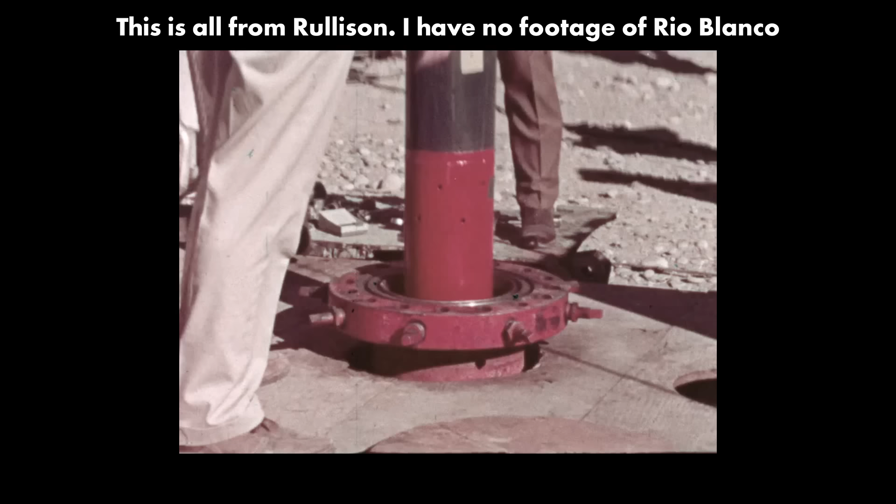Well, the reason for this turned out to be a lack of communication between the top and lower 2 rubble chimneys. The well was only producing meaningful amounts of gas from the fractured zone resulting from the top detonation. All that melted rock had solidified into radioactive glass. It pooled at the bottom of each chimney, exactly as predicted, but cut off upward flow from below.

For the cost of 3 atomic bombs, a complex drilling campaign, and a difficult subsurface detonation operation, Rio Blanco in effect created a gas well on top of 2 partially plugged gas wells.

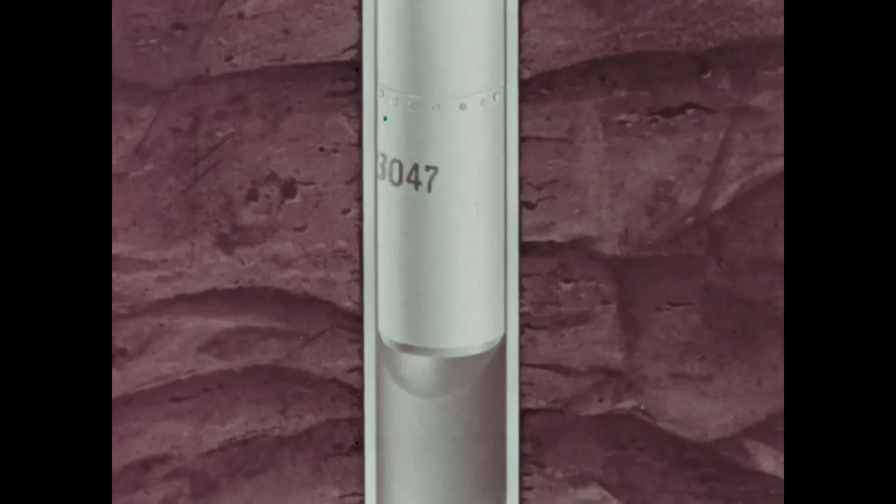So finally it was time for more nukes, and much bigger. 5 nukes, 100 kilotons each, for a total of 32 Hiroshimas, 10,000 feet under the surface of Wyoming. Oh, and by the way, they had to be exploded sequentially. A simultaneous detonation would contravene the Threshold Test Ban Treaty, which forbade tests above 150 kilotons in size.

Except this never happened. By 1973, public opposition to anything nuclear was accelerating. Yes, that would have absolutely dire consequences for how we produce electricity in the coming decades, but, and I can't stress this enough, a nuclear bomb is not a nuclear power station.

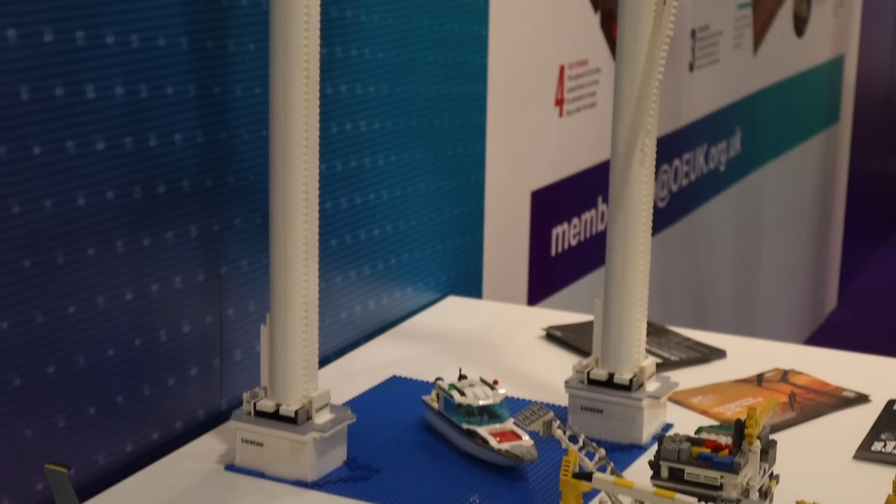In this case, though, I think we can all agree the opposition was well placed. When both the local public and various politicians in Washington got hold of the plan, it was stopped in its tracks. Rio Blanco was the last time the US ever tried to frack a well with a nuclear bomb.

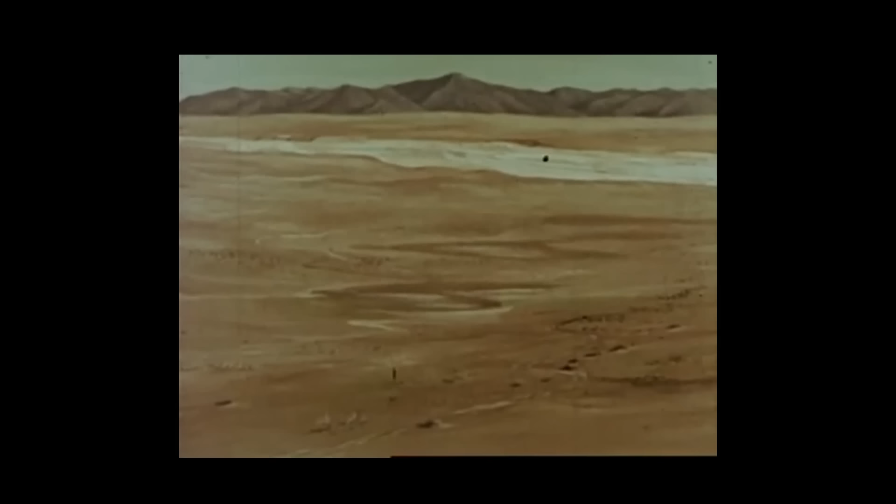So, let's summarise all the major problems with nuclear fracking. We've obviously discussed the radioactivity and the unpredictability, but there's something more fundamental. As I've alluded to many times now, a buried nuclear detonation delivers a huge amount of energy to the surrounding rock, and that energy release is essentially uncontrolled.

The hope for nuclear fracking was that enough of that energy would be mechanical and would go into fracturing the rock. But of course, much of it instead went into vaporising and melting the rock, completely wasting it. In fact, in the case of Rio Blanco, worse than wasting it, that melted rock actively hindered the gas flow.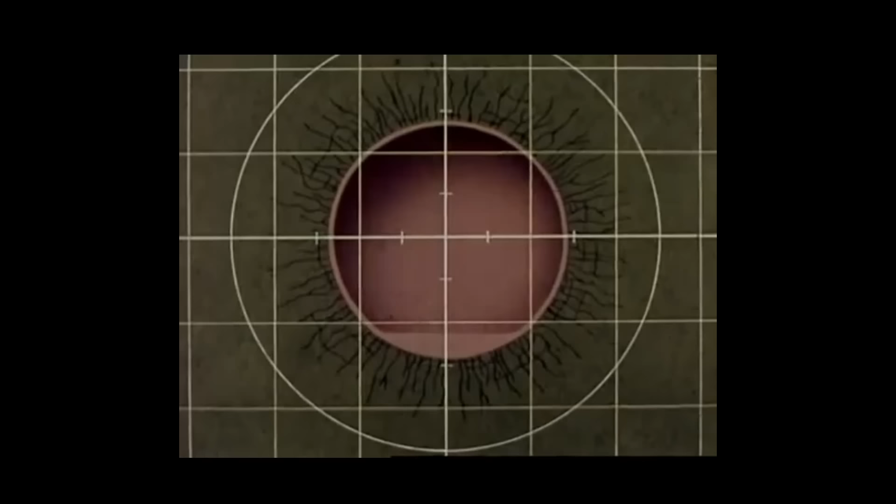If we lived in some alternative universe where we invented the atom bomb but not the nuclear reactor, maybe we'd still create nuclear power plants. We could detonate nukes in emplacement holes and inject water into the hot rock, turning it into steam to drive a turbine. That's a daft prospect, but it does raise a very serious question.

Well, it's not quite a negative energy balance, but it's hardly a great picture. The detonation for Rulison equaled 1/10 of all the gas that could be extracted from that well over a 20-year period. And had Wagon Wheel gone ahead, the energy put into fracturing may have actually been about equal to that of all the gas extracted.

Wouldn't it just be easier to make fuel rods from the uranium and use them in a nuclear reactor? And of course the answer to that is yes. Just the act of making an atomic bomb is wildly more difficult than making a fuel rod, with enrichment to something like 90% of uranium-235 required in the case of a bomb. Nuclear fuel rods are only enriched to something like 3.5% U-235.

So there you go. From an energy perspective, nuclear fracking is essentially a complete waste of time, a complete waste of energy, and therefore, in my opinion, quite possibly the most inefficient means of resource extraction ever attempted.

When executed well, hydraulic fracturing delivers just the right amount of energy to just the right place to fracture the rock in the best way to maximise gas or oil flow. Yep, you can frack an oil well too. It's been happening for about 50 years in the North Sea, and nobody cared about it until it came onshore.

Of course, the most common application is in tight gas reservoirs, where very little gas would naturally flow into a well. These usually consist of shale, so we may drill a horizontal section through the reservoir. There are multiple methods of fracking, but in this case we may perforate one section, pump fracking fluid at high pressure through those perforations and fracture the rock.

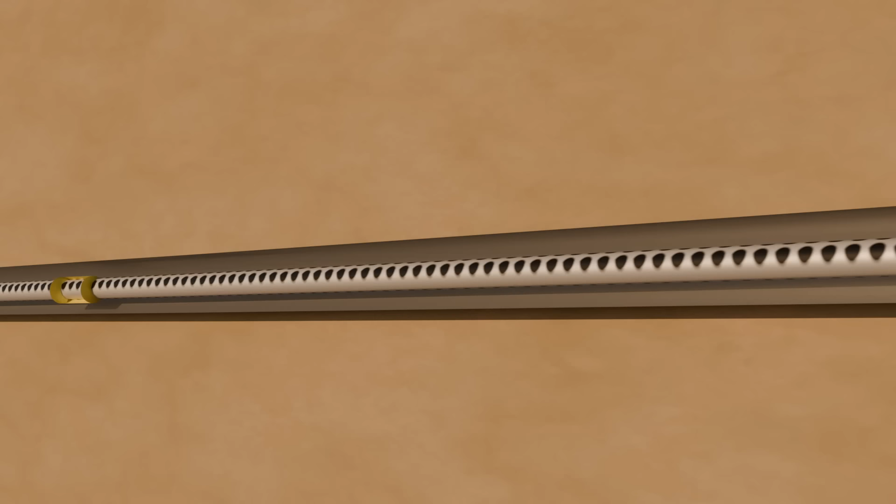If we monitor how much fluid is leaking off and ground movement using seismic sensors, we can build up a picture of where fractures are occurring and to what extent. That way we won't accidentally fracture into, say, an aquifer and contaminate it.

Speaking of that, contamination can occur from the reservoir itself, but also from that fracking fluid. If you're doing this in the UK, we're doing this in the UK, that fluid would be little more than water, biocide and sand. Biocide is basically bleach. We include that since bacteria getting into a reservoir can consume some of the hydrocarbon and produce toxic hydrogen sulfide.

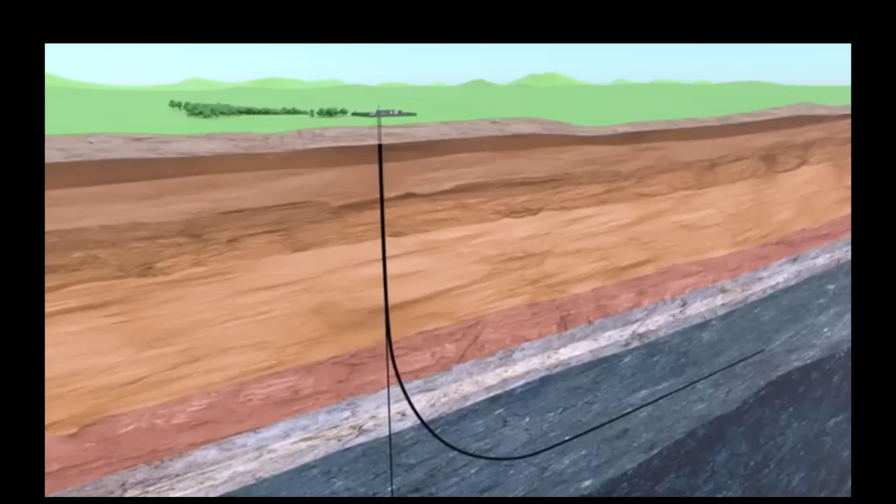You may also choose to do an acid frack if the reservoir is limestone. There we pump acid to etch channels to the fractures, hopefully further increasing permeability. Acid frack sounds really scary, but honestly, the acid's consumed in the process. It's not as bad as it sounds.

If you're doing this in America, well, throw whatever you want in that fluid, apparently. Additives to reduce fluid viscosity are commonplace, and in some cases can be environmentally harmful, so definitely don't frack into an aquifer. Okay, what's the sand for?

That is a proppant. It holds the fractures open when we reduce the pressure again. We then fire our next set of perforating charges, deploy an inflatable packer or something similar, and repeat, fracking the next section of the well.

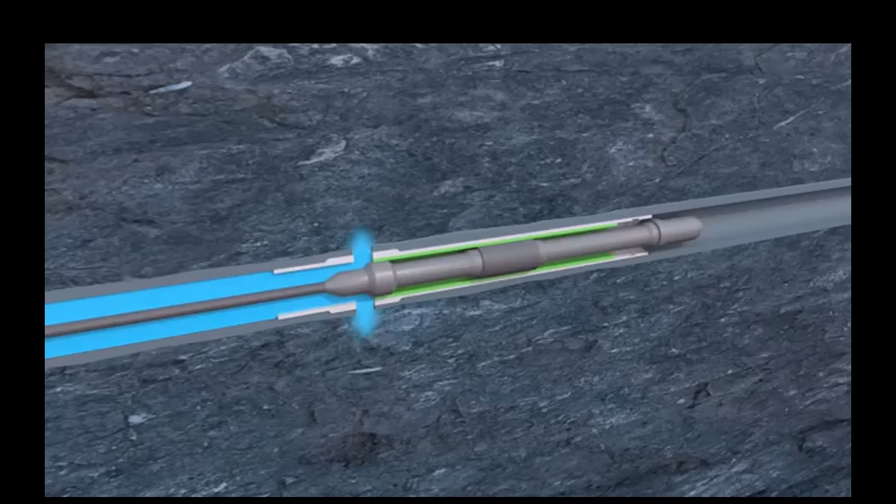Hydraulic fracturing is something we've basically mastered over recent decades. Sure, it can go wrong, really wrong. But the phrase 'things have gone a bit wrong' hits a bit different when nuclear explosives are involved. Oh, and hydraulic fracturing generally gives a higher gas yield than nuclear fracking, so from a commercial standpoint, the whole thing was a bit silly, really. But as I've hinted, the US tests went off without any recorded major injuries, fatalities, or serious safety incidents.

If you insist on detonating a nuke down a gas well, Gasbuggy, Rulison, and Rio Blanco demonstrated about the best way of doing it, thanks to good monitoring and adherence to safety standards. But I mentioned another country that tried out nuclear fracking. In their case, things went a bit wrong.

As someone living in 2025 and looking back, one of the great joys of the Cold War was the unwritten rule that if America did something stupid, the Soviets were compelled to do the same thing, but bigger. The fact is, though this video focuses on US experiments, the majority of nuclear fracking attempts took place in the USSR.

When the US announced Project Plowshare, the Soviets of course announced their bigger implementation with the catchy name, Nuclear Explosions for the National Economy. In fact, the Soviets were the first to attempt nuclear fracking.

They performed it in an oil reservoir in the Grachevka oil field, starting off with two 2.3 kiloton bombs in 1965, followed with a 7.6 kiloton bomb and another pair of 2.3 kiloton bombs later in the field life.

To their credit, the Soviets did actually share their results with the US engineers during a bilateral meeting in 1970, and the Americans traded their data with the Soviets. In fact, the Soviets went on to carry out nuclear fracking operations in 6 oil fields and 2 gas fields, giving a total of 25 detonations as far as I can make out.

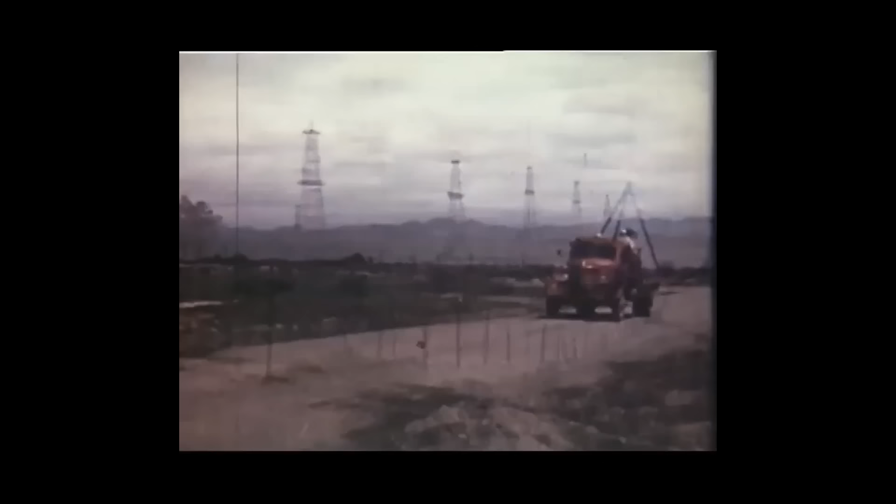The surface equipment at the Grachevka oil field was contaminated following drilling into the rubble chimney. It required decontamination, but without further study, I don't really know how severe that issue was.

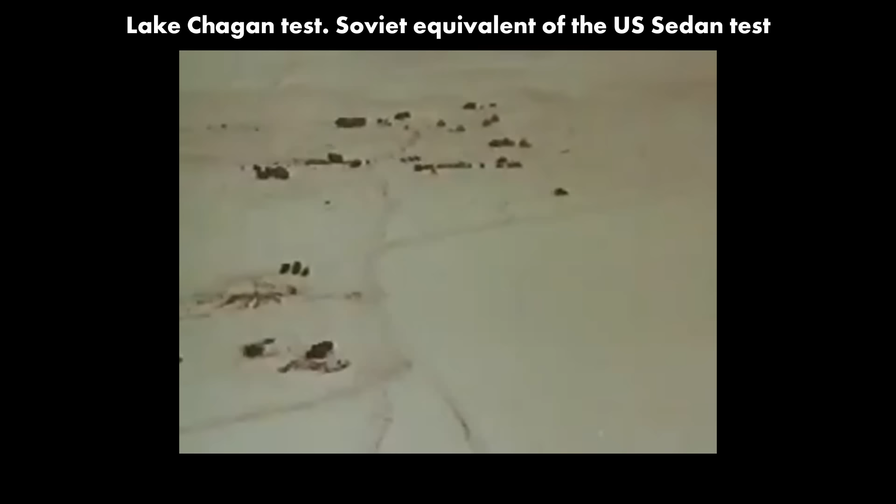This 1996 report from the Lawrence Livermore National Lab, the main source for this chapter, states that groundwater contamination was still an issue then. In fact, they quote reports from Russian media stating that contamination had spread to 65 other wells in the field, and threatened to contaminate the nearby Votkinsk reservoir, or even the Volga River in a worst-case scenario. Radiation levels up to 3 millirem per hour had been reported in some areas, and refineries had stopped accepting oil from the field. If that sounds like a bad outcome, here is a nightmare.

Okay, another quick two-sentence well engineering lesson. How do geophysicists detect oil reservoirs? One method is to detonate explosives at or near surface and measure the returning sound waves. By analysing them, it's possible to detect potential reservoirs.

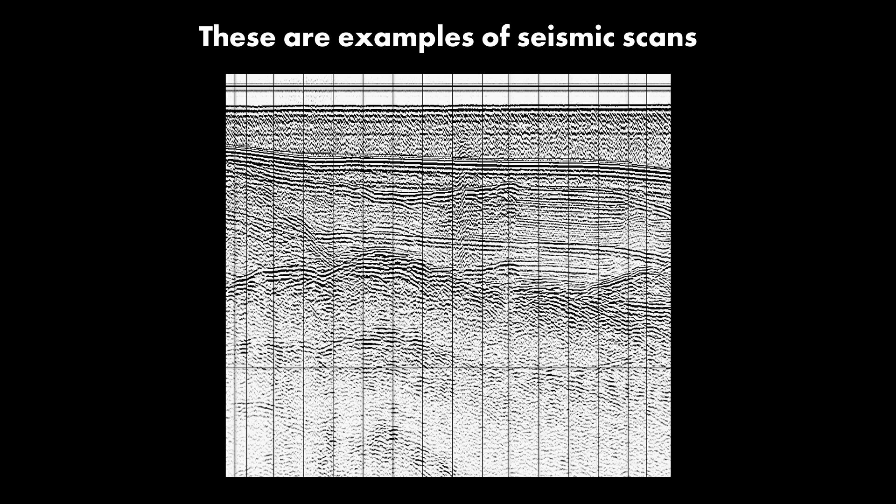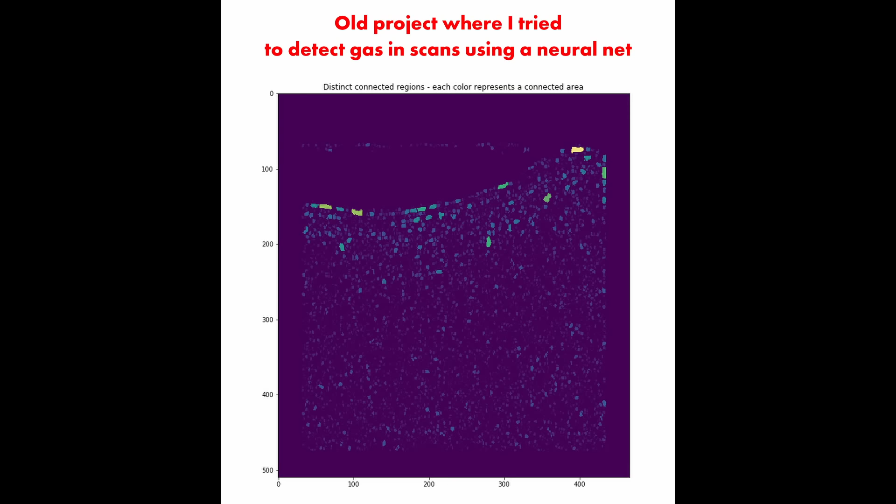How about using nukes to do that? This was the Deep Seismic Sounding Project, another facet of the Soviets' Nuclear Explosions for the National Economy project. Four of these explosions resulted in accidental and unplanned releases of radioactive material to atmosphere. The worst was the 1978 Kraton-3 test. In this case, the cement plug above the bomb failed and radioactive material spewed out from the emplacement hole uncontrolled. The world only really learned about this incident in the 1990s, and I don't have time to go into detail now, but it was a major event.

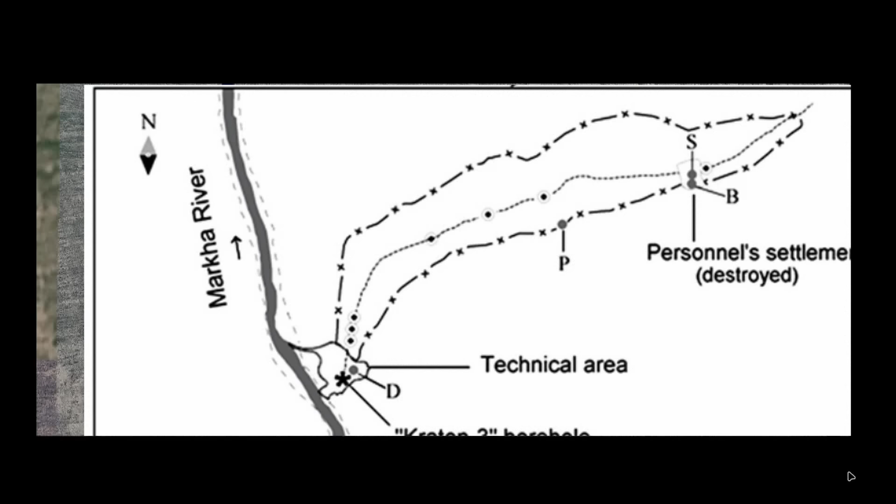Let's go and have a look at it on Google Maps. Oh god, here is the dead forest, still not grown back nearly 50 years later. The borehole was situated here, and this is a huge rock sarcophagus. The topsoil was removed and buried under this. That didn't stop radioactive contaminants leaking into the nearby water supply until the early 2000s.

Imagine if nuclear fracking became the norm. Based on the accident rates in the oil and gas industry up until about the 1990s, scenes like this could have been commonplace.

There is a second chapter to Soviets detonating nukes down wells, except this time, it was a unique success. There are caveats to that. Let's look at the situation.

Remember back in the first chapter when I explained you can't just pump the drilling fluid out of a well while it's being drilled - the gas would flow uncontrolled to surface, otherwise known as a blowout. If you have a blowout, you've already failed so badly, and that is the first caveat. Though the Soviets didn't have Red Adair, they were perfectly apt at dealing with blowouts. They had a lot of experience with them.

There are a few methods to try and stop a blowout once it's occurred. In reality, a relief well is often necessary. This involves setting up a second rig nearby, drilling a new well that intersects with the first one, and pumping heavy kill fluid down at high pressure to restore wellbore pressure and keep the gas in the reservoir.

A common question here is, why do they have to drill so deep? That looks like we're making things difficult. The answer is, if we intersected at a shallow depth, we'd expose the shallower formation to reservoir pressure, fracture it, and that is how you create this.

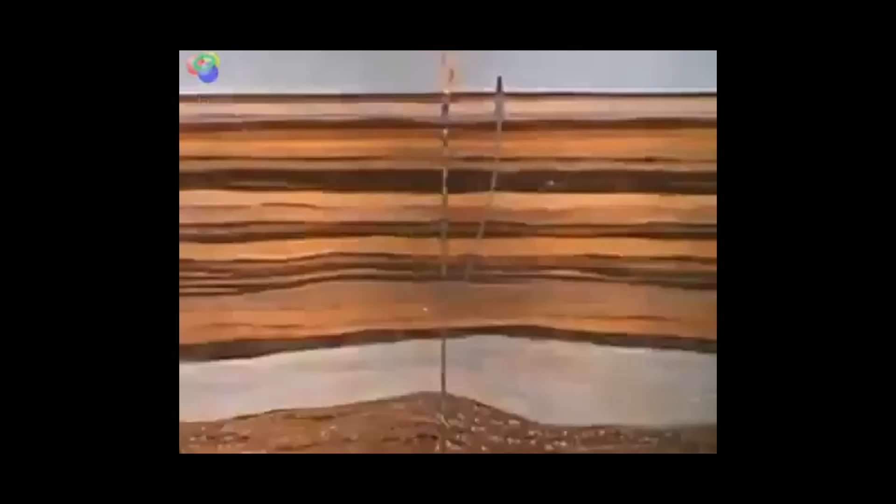We can all see where this is going, can't we? Get close enough to the main wellbore, run a nuke down, detonate it.

This turns the nearby rock to glass, crimps the well shut, and hopefully seals the blowout. I was always told the Soviets successfully stopped 4 blowouts using nuclear explosives, and the report from the last chapter all but confirms that. Of course, make of it what you will, it relies on Soviet data, so of course absolutely nothing went wrong. Though, when I worked in the industry, it was widely accepted and acknowledged that the Soviets did stop 4 blowouts using nukes.

Ominously, I was also told they failed at a 5th attempt, and that is briefly mentioned in this report. And I think that's the other caveat to a nuclear relief well. In a desperate situation, it could honestly come across as a better option than nothing.

Lazy tabloid newspapers published clickbait nonsense on the idea of using a nuke to stop the Macondo blowout back in 2010. That was such an ecological nightmare, yet so far from civilization, the argument could be made for risking a nuclear explosion to stop it. To be clear, it's not an argument I'd make.

But what does the failure case look like? Once we actually think about this, a nuclear relief well comes across as more of a high-stakes gamble than a pragmatic use of nuclear explosives. If the explosive fails to seal the well, we could rather easily be in exactly the same position as before, but instead of a burning unstoppable torrent of natural gas, we'd have a burning unstoppable torrent of radioactive natural gas.

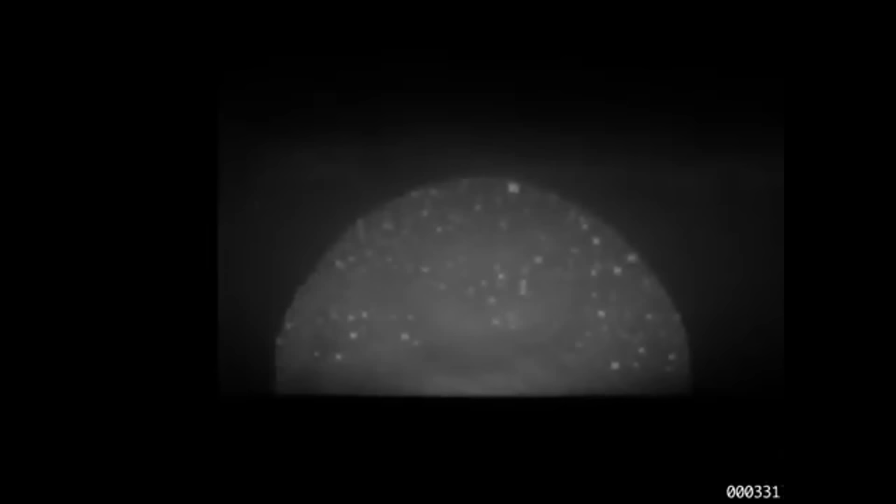Let's end this video with something that wasn't actually built, but was seriously proposed in this report as part of Project Plowshare. I began with a reference to the fictional world of Solstice 5 and its unhindered resource extraction. Another part of that story was large-scale excavation and landscaping by some kind of gargantuan fictional energy weapon. Well, I suppose nuclear weapons are a gargantuan energy weapon. How about using them to excavate a sea canal?

There are, of course, many obstacles to doing so, and so we'd want to do it somewhere relatively politically stable. A country that is relaxed and on good terms with its neighbours.

Israel! Oh, why did it have to be Israel? Okay, this section's probably going to rustle a few jimmies, but I suppose if you don't want your jimmies rustled, don't commit a genocide. Enough. No further context, let's nuke Israel.

Peacefully. So, this is a 1963 report from the Lawrence Livermore National Lab, which proposes nuking a sea canal through the Negev Desert in Israel. It is a legendary document. I have never read it before, so I thought it would be fun to finish this video off with me doing my first ever reading of the entire 2 pages of the plan that are presented here. I'll edit out the boring bits, but there won't be much to edit out.

So let's get started. So the title of this document is The Use of Nuclear Explosives for the Excavation of a Sea Level Canal Across the Negev Desert in Israel Connecting the Mediterranean with the Gulf of Aqaba. Quite a lot going on there. Okay, so let's just begin.

Another interesting application of nuclear excavation would be a sea level canal 160 miles long across Israel, connecting the Mediterranean with the Gulf of Aqaba, and thus the Red Sea and the Indian Ocean. Such a canal would be a strategically valuable alternate to the present Suez Canal, and would probably contribute greatly to the economic development of the surrounding area.